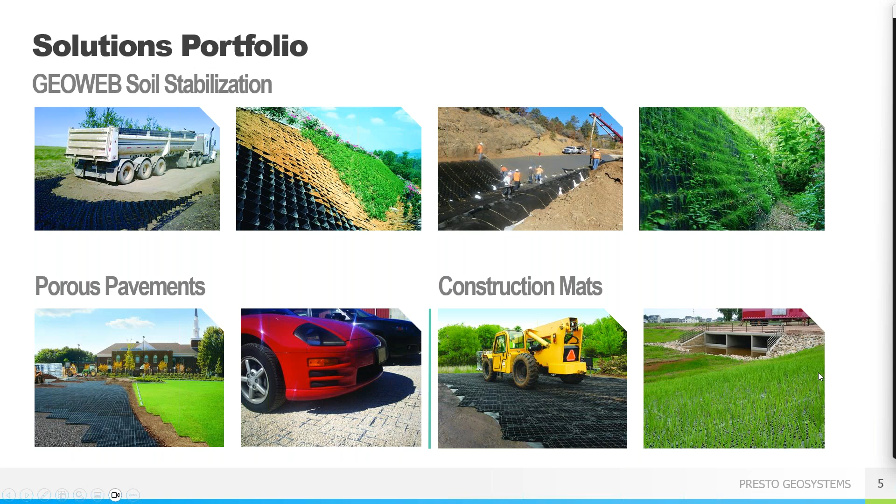We operate in 4 main categories. Today we'll be talking about load support, paved and unpaved roads. We can do slopes, different types of fill, and high flow channels, whether aggregate, topsoil, or concrete channels. We also build gravity and MSE retaining walls. We've done reinforced walls up to a couple hundred feet, so it's a pretty flexible solution. We also offer porous pavements: a vegetative porous pavement, GeoBlock, and GeoPave, which is an aggregate porous pavement. We also have construction mats, which we call GeoTerra, for accessing sites in place of timber mats.

So let's get right into how the Geoweb system works for paved and unpaved roads. The system has 2 main characteristics: the cell depth and the cell size. It comes in 3 different cell sizes, 20V, 30V, and 40V, so you're looking at 8.5 inch nominal diameter, 10.5, and then 18 inches nominal diameter. It comes in 5 different depths: 3, 4, 6, 8, and 12 inches. We do not use 12 inches for load support; it's very hard to get full compaction with a 12-inch depth, so we limit it to between 3 and 8 inches for load support applications.

It also comes in different lengths, so we'll work with you to have the best size in our project evaluation. I'll talk through the presentation about the different section lengths. When we provide a free project evaluation, we want to limit the waste, so we'll work with you laying out the system to provide the least amount of waste.

The ultrasonically welded seam that connects the cell walls is critical to the function of a geocell. That's the welded seam made inside the factory. The stronger the seam strength, the better the performance of the system, period. We make our Geoweb from 100% virgin HDPE, which provides the strongest wall strength. If the cell wall is too stiff, it can overstress the seams and potentially cause seam rupture.

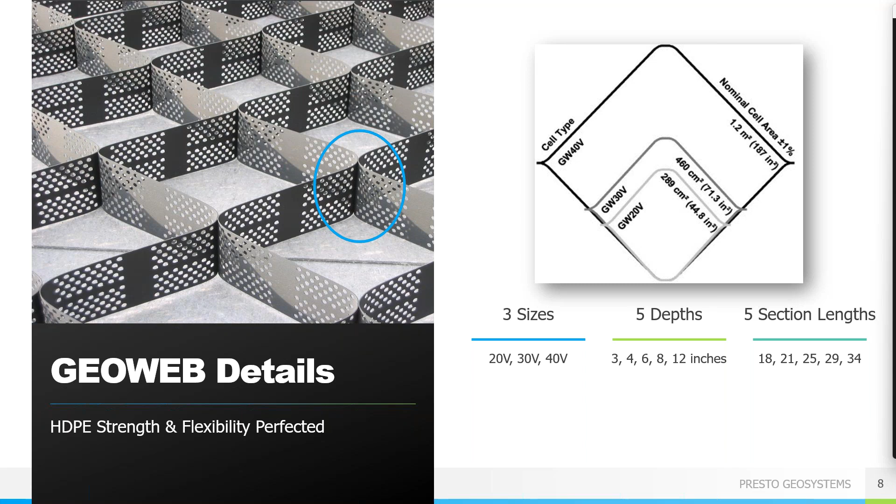Here you can see a typical Geoweb panel. It comes tri-folded on a pallet, 8.5 foot nominal, and as I mentioned before, in different section lengths.

It ships very efficiently. A typical 53-foot truck can carry about 125,000 square feet of GeoWeb and our accessories. So it does ship really effectively.

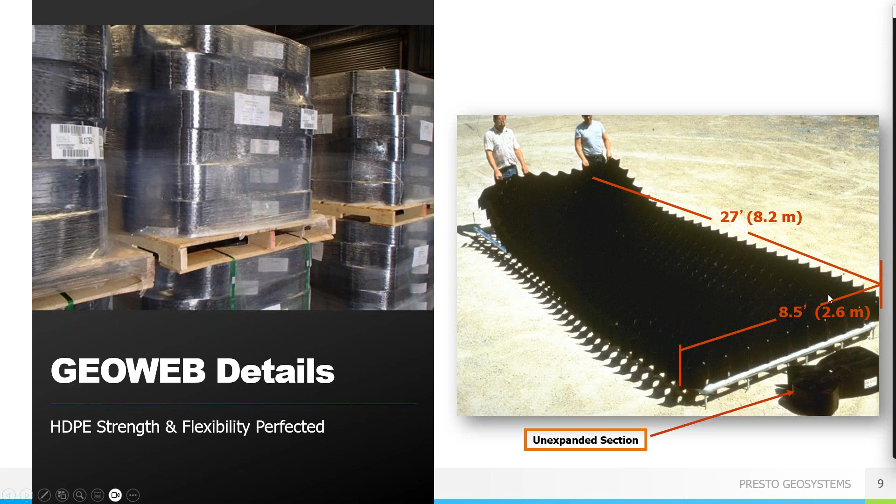The second characteristic is the infill material. There are 4 different types. We can fill it with a coarse sand. That was the original intent when we developed this technology with the Army Corps back in the 70s. It was actually called sand grid. And when we talk about sand infill, we want to make sure it's a coarse sand, like a number 35 sieve, which is about 0.5 millimeters.

We want to make sure that we don't use the beach sands or the real fine sand, stuff that doesn't drain. It compacts well, but it can actually clog, and when it gets wet, it wants to flow. So make sure it's a coarse sand, and we can work with you on that if you have a coarse sand locally available at a low cost. Like I said, it's an awesome infill. We also can use topsoil. We use it for vegetated roads, temporary vegetated roads, crushed aggregates, and concrete.

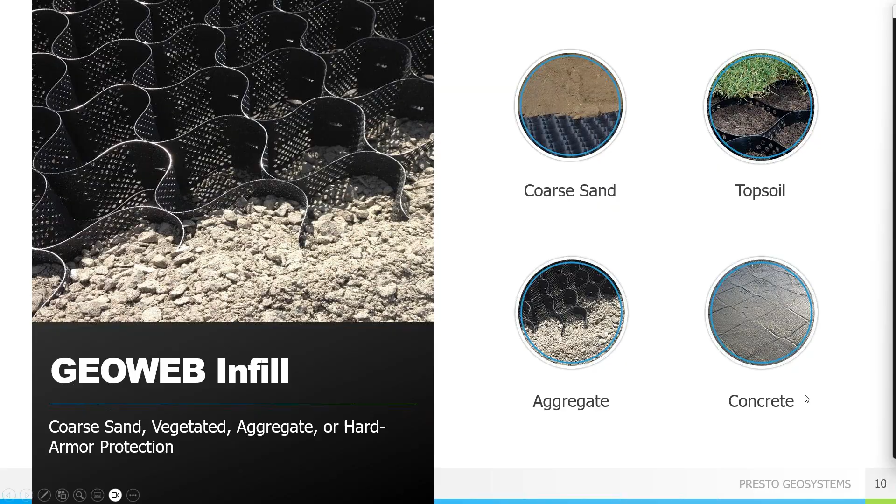So it comes with a wide range of accessories. We specifically designed all of these accessories for the various applications. They're engineered to enhance both the long-term structural integrity and the efficiency of the installation. When we provide the free evaluation, we're going to have calculations in there. Our calculations are based specifically and exclusively on using Presto's GeoWeb and our accessories, and they don't really apply to any other geocell manufacturers.

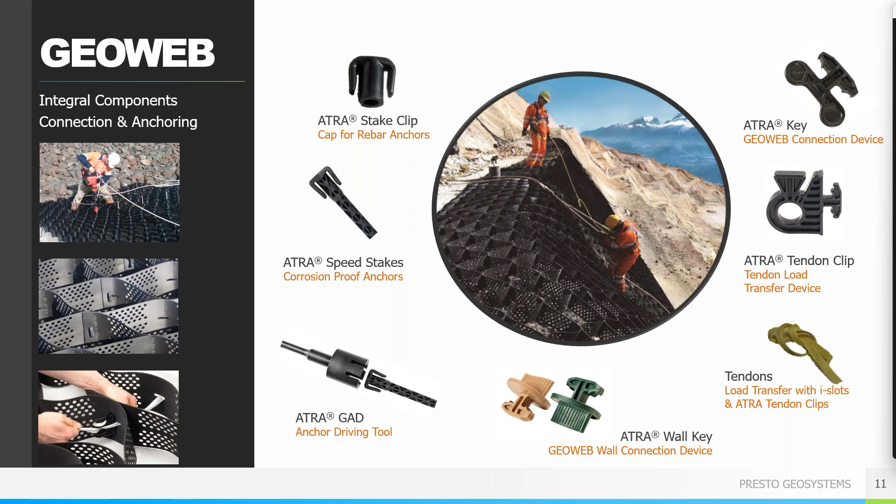So just remember that if it goes to bid and someone wants to provide a lower cost solution, make sure that they provide a full evaluation based on their accessories, because we have really the strongest accessories out there, whether that's for load support applications, slopes, walls, or channels.

For load support applications, the main one is the ATRA Key. The ATRA Key is used to connect the panels side to side and end to end. It really does speed up installation. They're made from 100% plastic, so they'll last the lifetime of the project. They really do ensure that the panels remain securely connected and don't separate under any anticipated load. Their specific engineering value pretty much guarantees the durability over time.

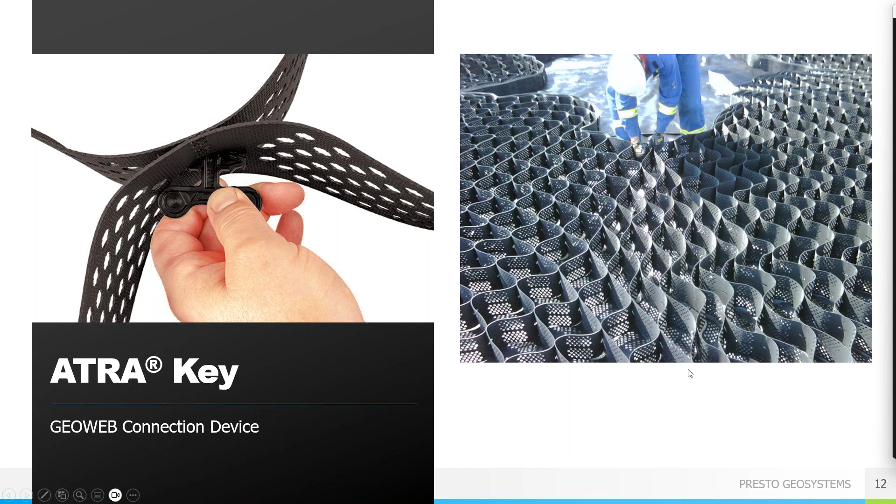When we first started using GeoWeb, we actually connected the panels with metal staples, and you can imagine over time, the metal staples are going to corrode and lead to potential separation of the panels. You can see a person here connecting the panels together with the ATRA Key. Here's an up close photo of it.

If you look at the top and bottom of the ATRA Key, you can see these frictional barbs. This is a recent improvement from a couple of years ago. We basically wanted to increase that frictional lockup between the cell wall and the ATRA Key. These frictional barbs really do protect the connection against the 3 primary modes of mechanical junction failure: shearing, splitting, and peeling. We'll also evaluate the factor of safety for those connections in our project evaluations I'll show you.

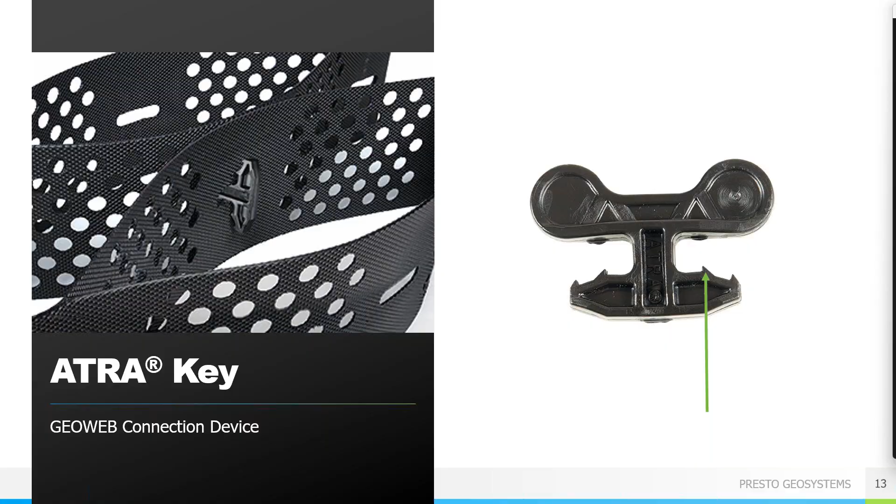So it really is crucial that you get full calculations for all of your different geocell projects, looking at those 3 primary modes of panel connection failure, which are shearing, splitting, and peeling. I just want to briefly show you a couple other ones.

When we developed our ATRA Keys, we really wanted to develop them with 2 goals in sight. One was safety. We used to use those metal staplers. You had generators, hoses, pneumatic staplers, so there were a lot of tripping hazards out there. We also went to the contractors and asked them for feedback. They said they wanted something very safe, but also very quick, and something that's going to maximize the strength, so they're not going to have to worry about any panel separation.

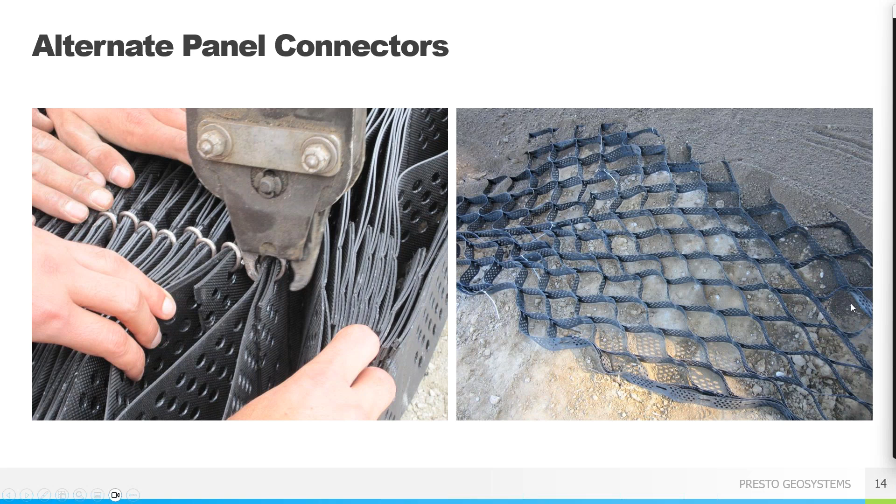So that's how we came up with the ATRA Key. It gets rid of all that associated equipment and all those tripping hazards. It allows you to connect the panels together with safety and efficiency in mind. Here's another one that shows metal hog rings. You can imagine the safety concerns with that. We do a lot of work with the railroads and mines, and you can just imagine the safety director seeing some of these connections. So just make sure that it's a safe connection when you're looking at different systems.

GeoWeb and our accessories are 100% made in the United States under a pretty stringent quality assurance and environmental control process. We comply with all the requirements of Build America, Buy America under the Infrastructure Investment and Jobs Act. So if you're interested in that, or you have a customer that has questions on that, we'd be more than happy to provide all the certifications, not only for the GeoWeb itself, but also for any type of accessory. Everything we have is made in the United States.

So it's manufactured from a proprietary blend of high quality virgin HDPE resin. We have proven our durability over the last 40 plus years since we've been installing GeoWeb. Like I mentioned before, we don't have any fillers such as calcium carbonate, recycled materials, or polymer alloys. It's 100% HDPE.

We add carbon black to it for UV protection, or HALS for color protection if it's for walls. But testing has shown well over 100 years even before the carbon starts to degrade, and that's when it's subjected to 100% direct UV sunlight. Load support applications are always buried in the ground, so they're going to pretty much last forever. So just make sure that the geocells you're looking at are 100% HDPE.

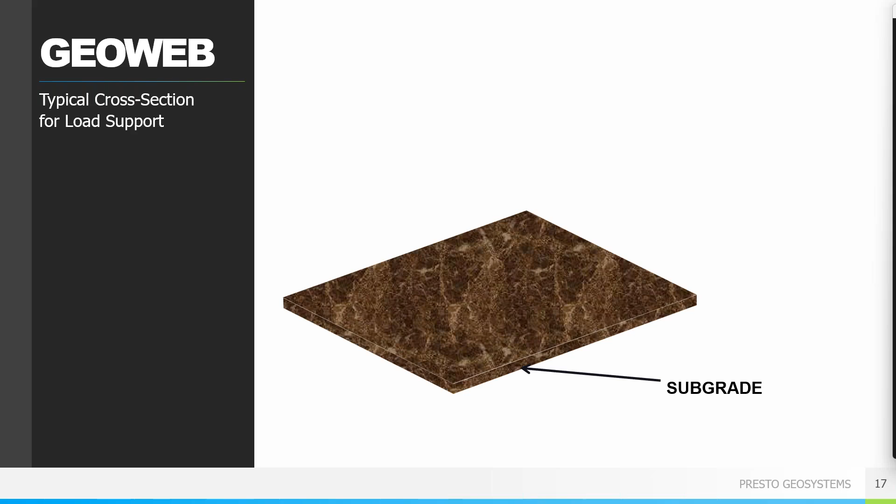Here's just a typical cross section. You've got a subgrade under a certain strength. We're usually going to put a woven or a non-woven geotextile down. When I talk about woven geotextiles, they're not slit tape wovens that don't allow water to flow freely to the subgrade.

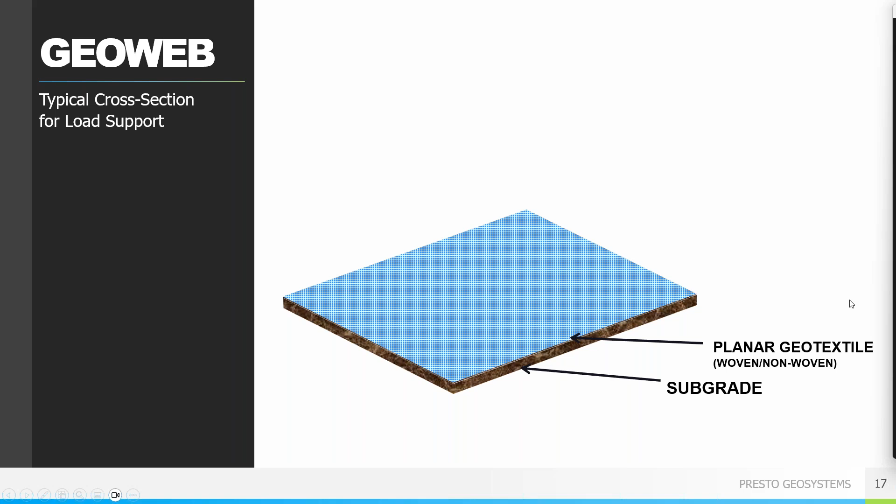So we're going to have what I call enhanced wovens, or what they're called in the new AREMA railroad spec or the new AASHTO M288 highway spec. So they're called enhanced woven geotextiles. They allow water to freely flow. They keep the fines underneath, but they also provide reinforcement starting at about 2,800 pounds per foot. They're pretty inexpensive, so you really get a lot of bang for your buck.

So sometimes we're going to have a sub base, and we'll determine that based on your site specific conditions, what your subgrade strength is and what the load is. We're going to have a GeoWeb panel. Once again, we'll do the size and the structure. Infill, as I mentioned, is very flexible. We can use coarse sands, aggregate, topsoil if you want a vegetated type surface, aggregate for temporary roads, or even concrete.

So depending on the application, a paved or unpaved road, if it's unpaved, usually we're going to have about a 2-inch wear surface over the top of it, just to protect those top cell walls. So we'll make sure the evaluation that we provide to you really does support all of those loads throughout the life of the project.

So this is how 3D confinement really works. When you have a given vertical load, we really want to get that vertical load as horizontal as possible. So that's where we really shine with those low quality aggregates, the coarse sands, and potentially even recycled materials. We want that vertical load to activate the active earth pressure inside of the loaded cell, to actually direct that vertical load horizontally, engage it with the cell wall to engage the hoop stresses, and also to engage the passive earth pressure in the adjacent cells. So the active pressure pushes out, and the passive earth pressure pushes in to really support that load.

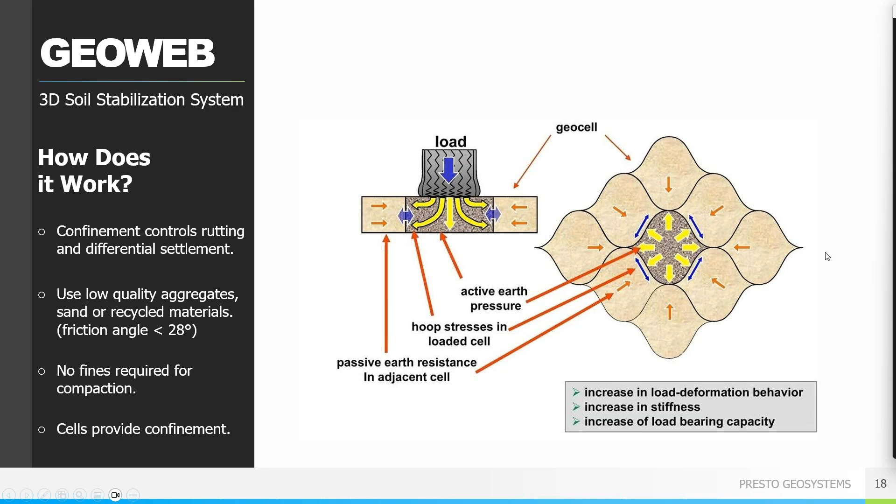Another good thing about GeoWeb is we really do provide the confinement. So a lot of our projects will have open graded aggregate for, as I mentioned before, stormwater control. A lot of times, if you have a situation where you need to get a lot of drainage through the cross section, we can fill it with basically no fines in it, because the GeoWeb will provide that confinement. So another option is an open graded aggregate if you want a lot of drainage.

Here you can see the difference of stresses on the subgrade due to the loading. You can see the unreinforced on the left, with a typical 45-degree load distribution. You see all your high stresses here, the red and the orange. How the GeoWeb really works is what we call the mattress effect. It really spreads that load out over a much wider distribution angle.

So by spreading it out, we're going to significantly reduce the stress reaching the subgrade. Rule of thumb, if you're looking at a GeoWeb load support, we can reduce that stress by at least 50%, because we completely eliminate all those high stresses, the red and the orange. So our rule of thumb is about 50% starting out.

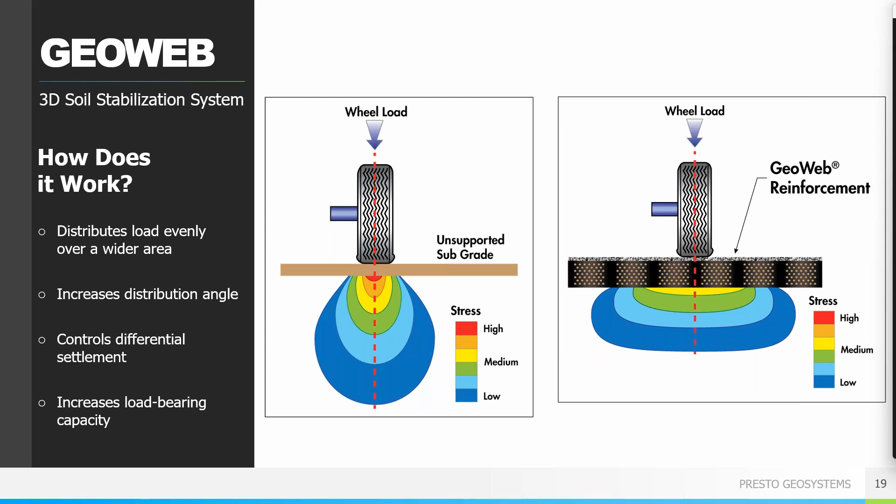So extremely strong. Let's talk a little bit about some recent research that we've done. We went to the University of Kansas under the direction of Jie Han. I'm sure a lot of people have heard of Jie, seen him at conferences. He's part of the Giroud-Han formula for unpaved roads and for geocells, geogrids, and other geotextiles. He's been working on geocells for 20 plus years.

Ben Leshchinsky from Oregon State completed his PhD thesis on geocells. He's also the chairman of the IGS committee right now, and he did the finite element analysis. Then Hai Huang from Penn State provided some smart rock technology.

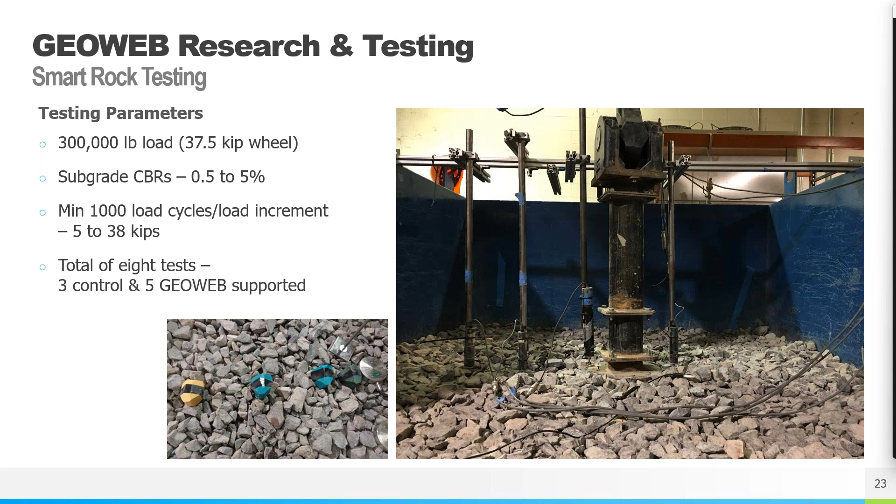Here you can see me using this recent technology to look at the stabilization benefits of that system. We used basically a loaded cell, and we put earth pressure sensors in there to measure the earth pressure and the stress distribution through. We also added some smart rocks through Dr. Huang from Penn State. What these do is measure how the particles move through the cross section when they're under a cyclical load. So we added those smart rocks inside of the GeoWeb.

You can imagine, through confinement, there's hardly going to be any movement at all. We also placed them halfway between the top of the cell and the top of the cross section—a couple inches below and a couple inches above the top cell of the GeoWeb system. So we really wanted to see how we could document reducing the stress above.

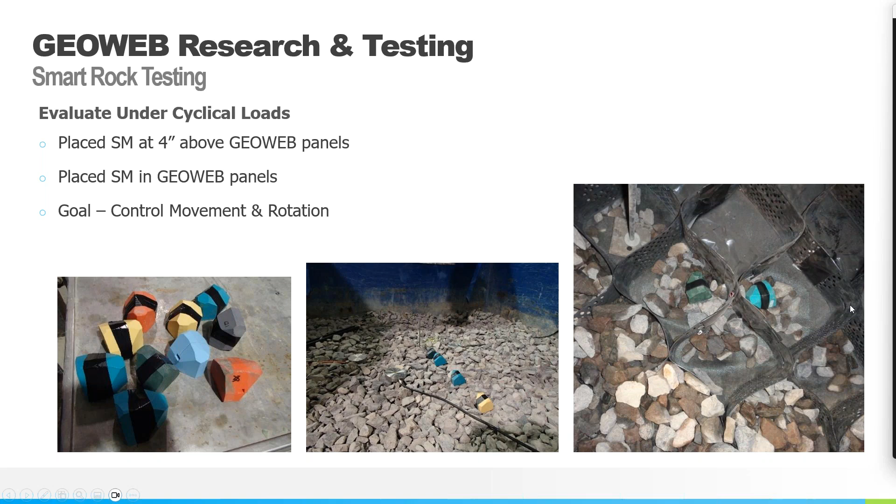Over the last 40 years, many people have reached out, but we've never really had the ability to use these smart rocks. It's a recent technology, only over the last 5-6 years. So we really wanted to see how that aggregate moves.

Here you can see this is basically how it moves in rotation—how that aggregate particle is going to move. So this is measuring your rotation. We also wanted to measure the movement, so how it moves in the XY plane. So every cyclical load, we want to see not only does it rotate, but does it move. Why is that important?

Because when a particle moves under an unpaved or even a paved surface under stress, if it starts to move, it's going to start to break down. We see this a lot on railroads where you get ballast breakdown and attrition and settlement. You've got to go in there, do some retuning of the ballast layers and tamping. So it is pretty impressive.

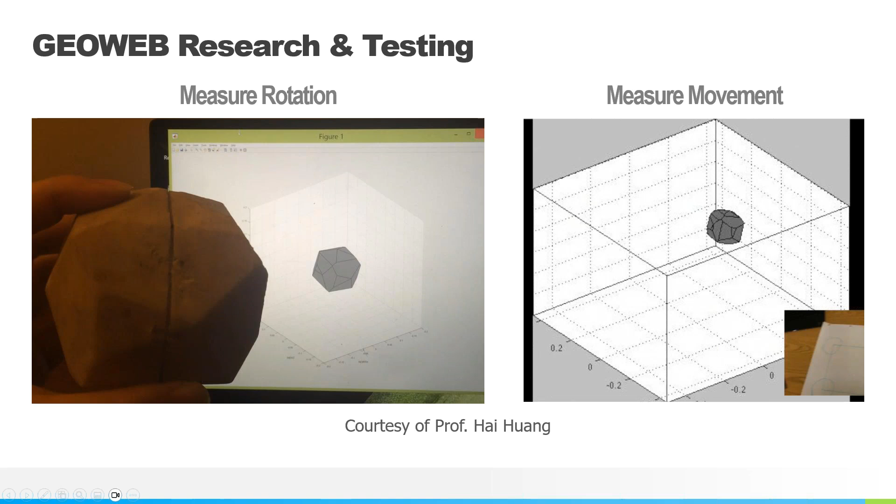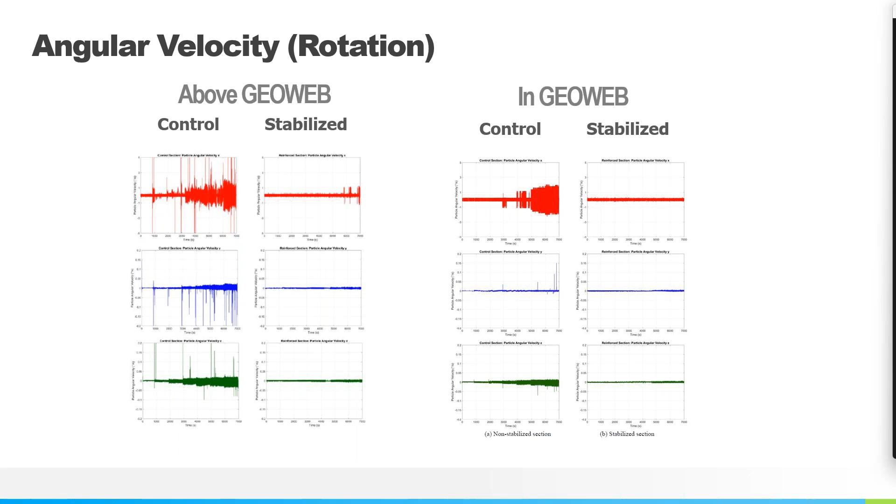This one really does illustrate the angular velocity—how fast that aggregate particle rotates. You can see the big one is inside the GeoWeb. You can imagine there's going to be very little movement in the stabilized section inside the GeoWeb panel. But this is a couple inches above the GeoWeb panel and below that surface. You can see in the control section, where there's no stability, there are massive amounts of rotation of that aggregate particle. So it's going to want to roll. It's going to want to break down over time.

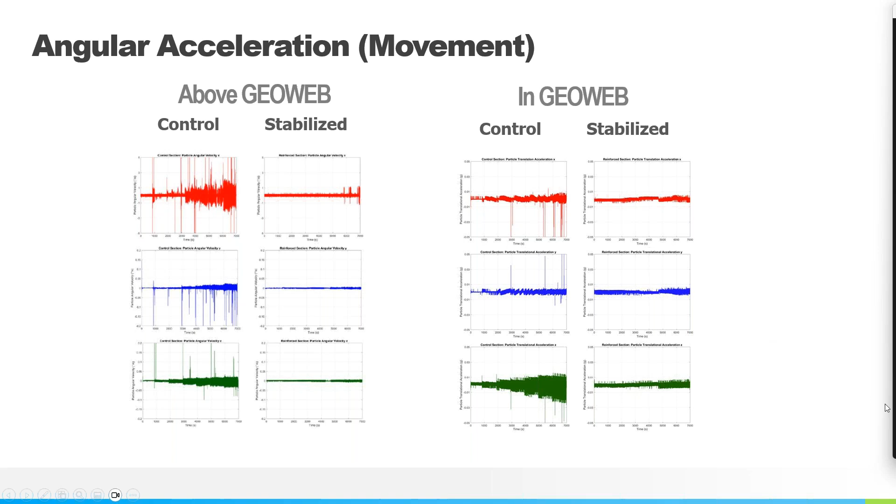Once again, another slide looking at movement—the back and forth I showed you. In the GeoWeb panel, you can imagine no real improvement needed, since there's little movement in the stabilized section already. But here in the control versus stabilized, a couple inches above, you can see once again massive lateral movement of that particle. The GeoWeb almost completely eliminates any movement in that zone. Why is that important? Because you're not going to get any rutting. So for unpaved roads, we're going to really decrease or almost eliminate that rutting above the GeoWeb layer. And we can actually prove this to you in the calculation.

So, pretty impressive results. We're going to really reduce the pressure reaching the sub base. That's really accomplished through the stabilization and the prevention of both the lateral movement and the rotation of that aggregate particle. So by reducing that movement, we're really going to decrease the abrasion and attrition—basically less or no rutting. So less attrition means you're going to have a stronger and stable surface.

So really for unpaved roads, we can significantly decrease the amount of maintenance that you're doing. We have a lot of case studies out there. We've saved on big areas like reach stackers for intermodal and port yards, for aggregates, mining haul roads where we had projects that were on, say, a mining haul road, almost every day with the grader maintaining those roads, and we could cut that to a month or less even. So it's a pretty significant reduction. If you have any interest in that, please reach out to me and I can provide some case studies.

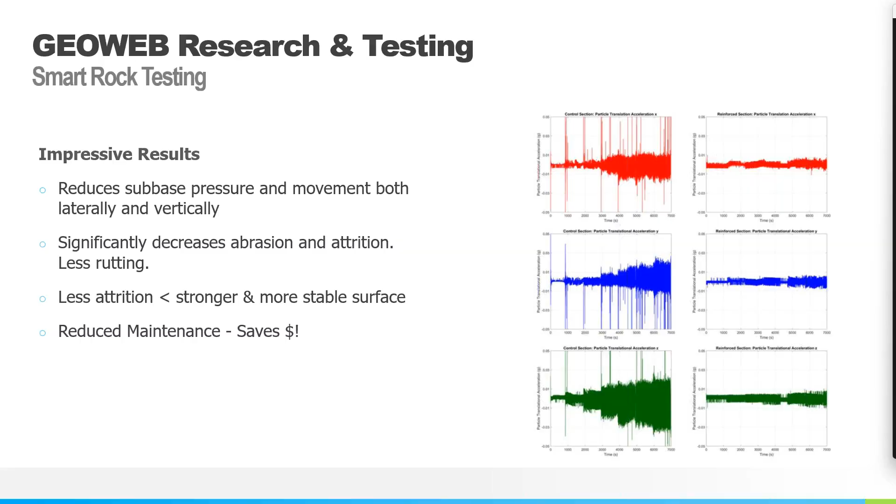So just a couple examples here on some unpaved roads. This was a project that we did down in Louisiana. This was interesting because it was a value engineered solution. Burns & McDonnell, we do a lot of work with them, and they had this job down there with pretty low subgrade CBRs, a wet area. It's in Louisiana, so high rains.

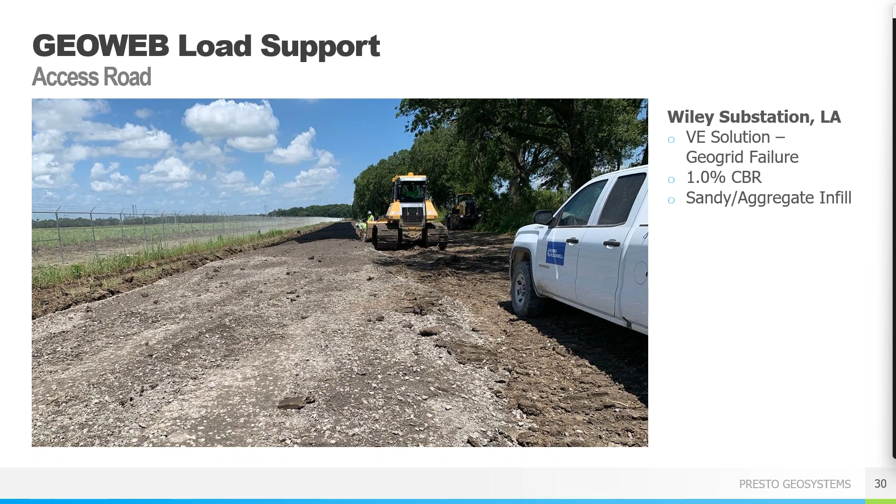They had a project they started on. They were going to use some geogrids and about 12 inches of aggregate. They started on the project, and it was basically just too wet. The subgrade was too soft or too low for the geogrids to work, and they had to pull it all out. And they came to us, and we did a value engineering solution using one of those enhanced woven geotextiles.

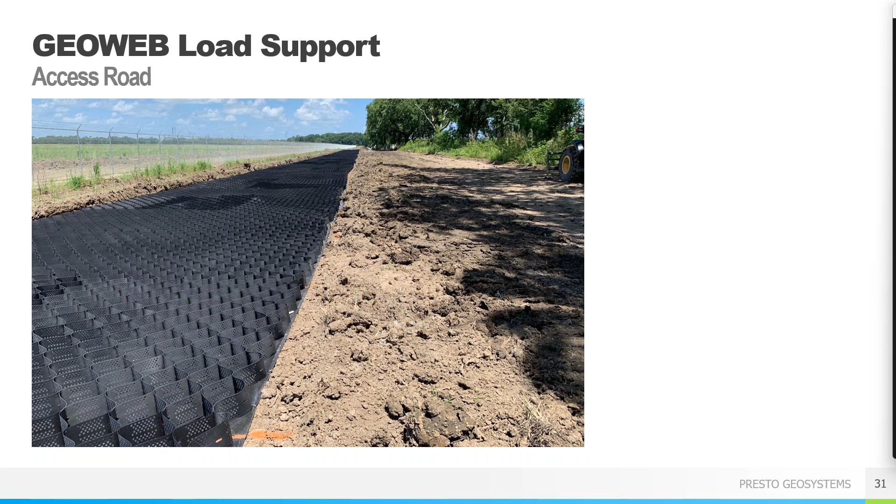You can see GeoWeb is, as I mentioned before too, really flexible. It can accommodate either inside or outside curves. You basically just over-expand or under-expand them.

And just so you know, we will be on site on these projects to help the contractor. We also do a lot of Teams meetings beforehand to go through methods to help the installation process, speed it up, and make it more efficient. So like I said, we'll be on site with you, whether that's one of our manufacturer's reps who is certified and trained before they go out on site, or it's going to be someone from Presto itself. We've been all around the world doing installs, so we'll definitely be there to support you and your contractor.

So here you can just see how pretty much how easy it is. You just back the dump truck up to the edge of the GeoWeb panel. You're going to have, most of the time, a dozer or grader, something with a GPS unit on it, where they just spread it out. Like I said, it goes down really fast. The good thing here is they saved a lot of money, not only in time and something that worked, but they were able to use that low quality fill, which saved them a good deal of money.

And here you can see the final road going in and around the corners. This one's been in for probably five to six years now, and they just do limited maintenance, just to get the surface up to maintain a couple inch wear surface.

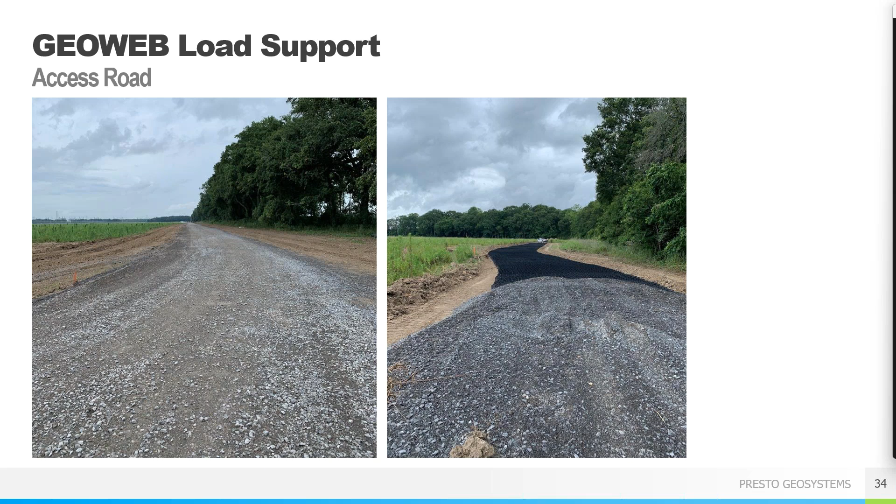So this was an interesting project we did up in Canada. This was for a big sawmill. In the spring and summer, they had a lot of snow melt and rain, which caused a lot of flooding and soft ground. You can imagine the permafrost or the frost coming on the ground created a lot of issues—drainage issues and rutting—basically creating some really unsafe conditions for the workers, but more importantly, it just wreaked havoc on the machinery. So all the machines running around that yard were getting all gunked up with mud and muck, so they had to do a lot of maintenance.

So this owner had used GeoWeb successfully before, so they reached out to our distributor in Canada, and they went to the site, saw it, took some pictures, and came back. We prepared a full evaluation for them—written summary, cross sections, calculations, specs, and installation support.

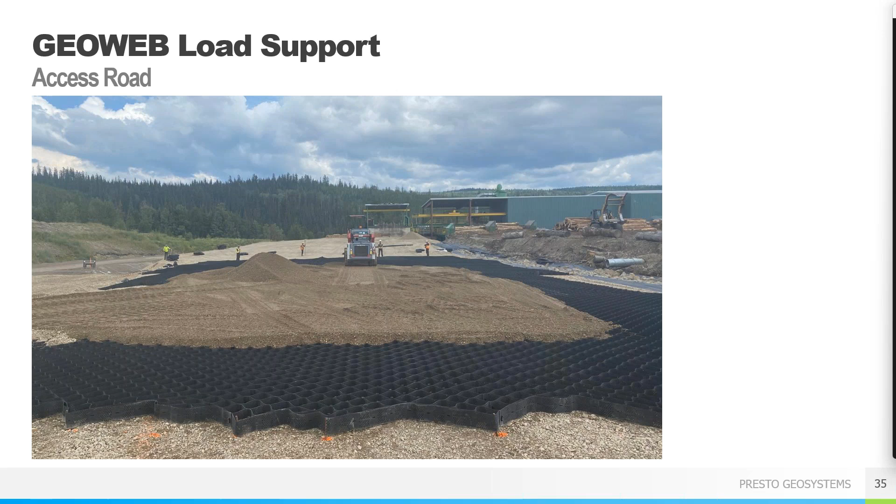Really had to come up with something not only to support those loads, but to manage that water, manage that snow melt, and also stormwater, with the heavy rains that came into the summer, into the fall. So the engineer here called out for a really large rock, I think about a 2-inch minus.

So they really wanted to get that water to flow freely underneath the GeoWeb layer. They put down a non-woven or enhanced woven geotextile, built up that layer, then another layer of enhanced woven geotextile, and a 6-inch GeoWeb layer on top with a 2 to 3 inch wear surface. Rule of thumb if you want water to flow freely through here, you want to shoot for about 12% plus or minus a little bit for the fines content.

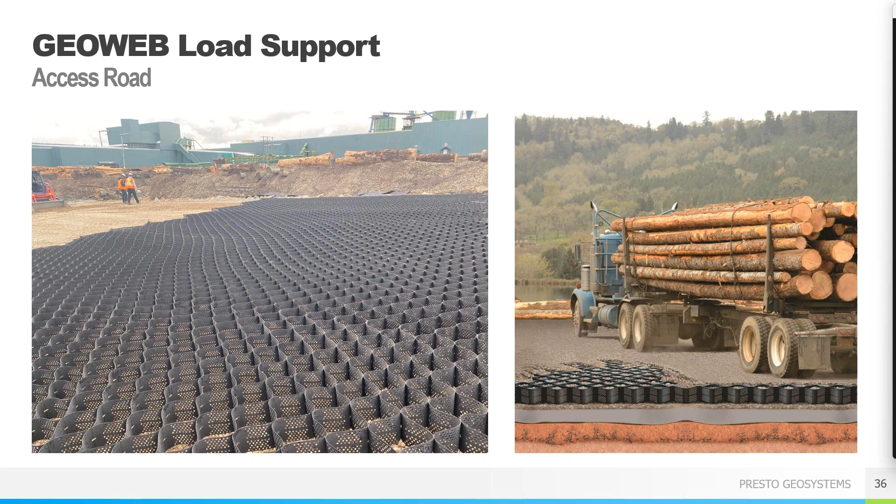Passing the 200 sieve, you want to be able to have that water flow. Rule of thumb, 12% plus or minus a little bit. The 200 sieve really allows for free drainage. We will work with you—if you can send us gradation curves, we'll take a look and tell you, in our opinion, if it'll work and if it will drain. You can see here, this one's about 12 to 14% fines.

So just infilling it into the panels, once again the enhanced woven geotextile. We'll work with you on that infill material.

Here you can see the project going in, creating a smooth platform. I like to show this slide because of rolling and compaction. Most contractors, when installing things for load support, whether it's grids or fabrics or anything, or unreinforced, they really want to hammer it with vibration.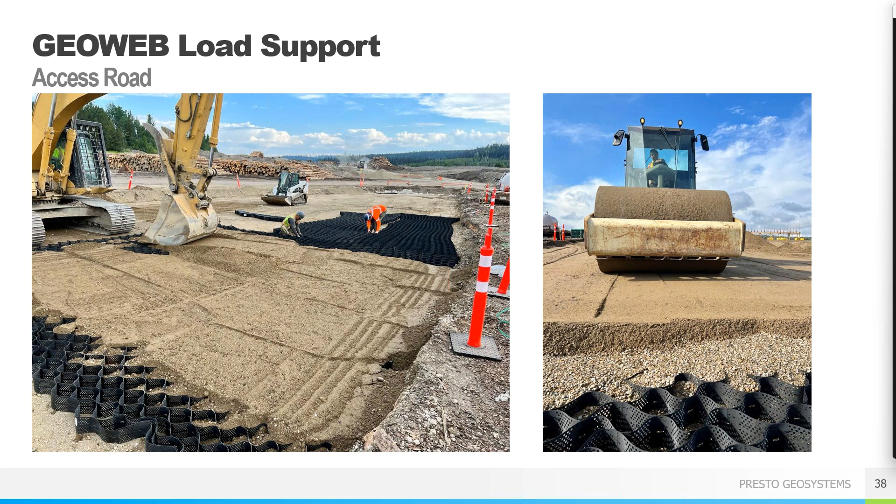Once again, someone from us will be on site, so we'll be able to monitor that too with you when they get started. So here's a project we did back a couple years ago.

The customer reached out to us because they had a failing access road, and we'd had really good project success with them. This was a 7.5 mile road, a secondary road into a regional facility up in Canada. Once again, spring melt, snow, frost. This road went to neglect because they didn't maintain it, so they wanted to improve it because they're opening up another facility.

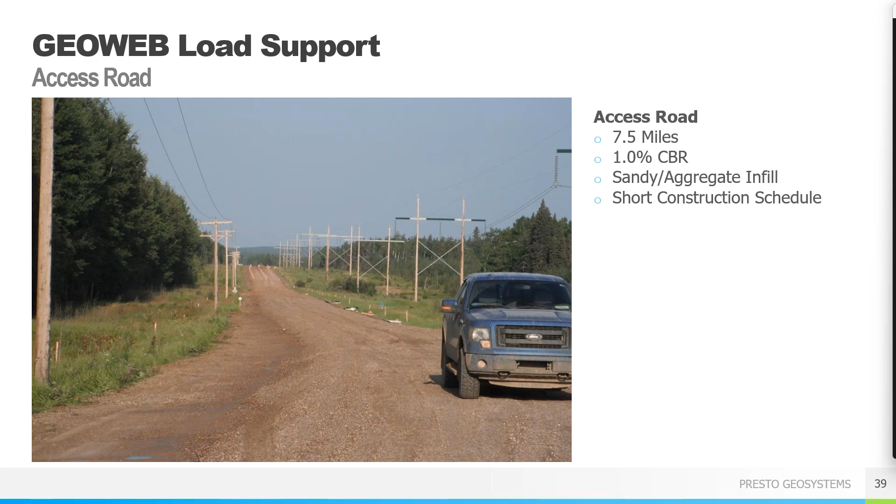One of the issues is we had a really brief period of only 2 weeks to get all 7.5 miles of road done. We did successfully complete it as designed during the wet season.

Here you can see the roadway before the installation began—very wet, low strength subgrade, about a CBR of 1. It did vary from almost 0.5 up to about 1.5.

So we had the stage materials on the side of the road. This really helps speed up installation, so you don't have to handle materials multiple times. We can help you with that through the Teams meeting and on site.

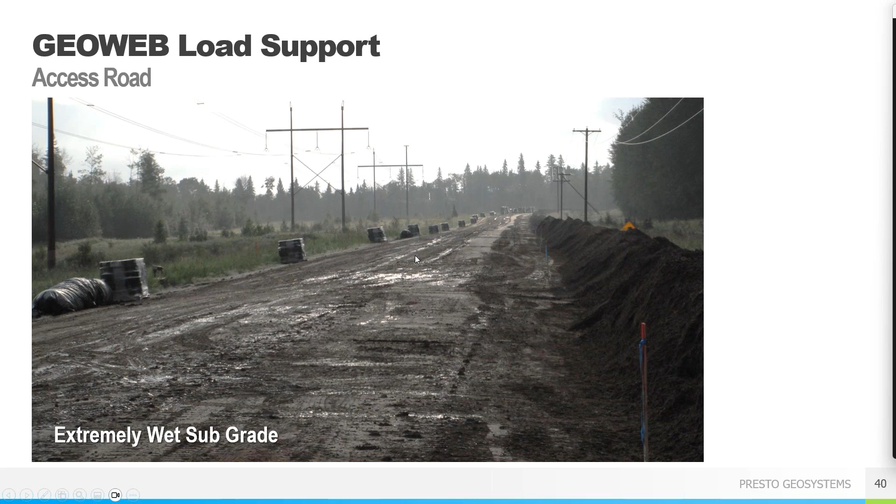We also had this fiber optic line running down one side of the road, so we really had to restrict anything going on that side of the road where the fiber optic line was. Here you can see the panels being connected with the ATRA keys.

Something I'd recommend for any load support application, whether it's using geotextiles with or without GeoWeb: if you're looking at long roads using woven geotextiles, more than one roll, say 15 feet, you should really evaluate the use of factory seaming them. If anyone's tried to overlap geotextiles in the field, especially in an open, windy field—for low subgrades we use the AASHTO M288 spec, which requires about 3 feet of overlap on really low subgrade CBR and less. So it's important to have a consistent 3-foot seam overlap, especially when it's windy, 20-30 mile winds, out in the middle of a farm field.

If you've ever done it, you understand what I'm saying, because it just blows - it's almost impossible to get that. So really take a look at factory seaming. We can work through that with you with our distribution network and the geotextile manufacturers. If that's something you want to look at, we'll look at it too. If it's a good option, cost-wise it's about the same - a little bit of cost to seam it pretty much covers the cost of overlapping the field. So it's a very good thing to look at for wider applications.

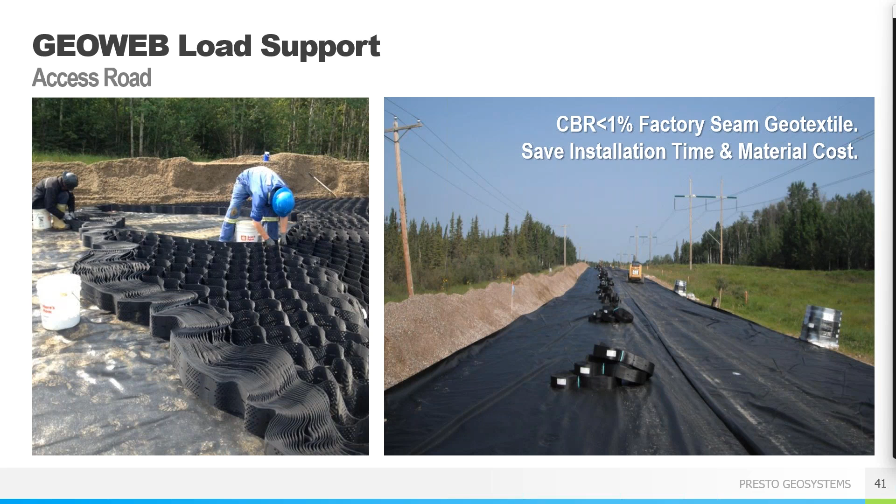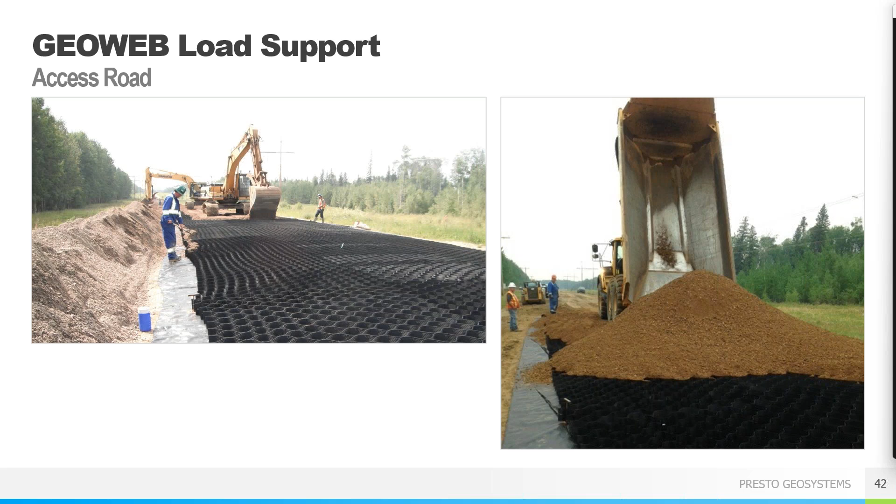Here you can just see the infill being stockpiled. Once again, this backs up and dumps the aggregate infill. This was a low quality aggregate, not very high quality, had a lot of sand in it, a lot of coarse sand. We don't want to use fine sands, but this is a coarse sand aggregate mix, about a 3/4 inch crush with a lot of sand in it. Here you can see we're getting that aggregate in, spreading it out and placing it with the bulldozer, usually with the GPS unit on it.

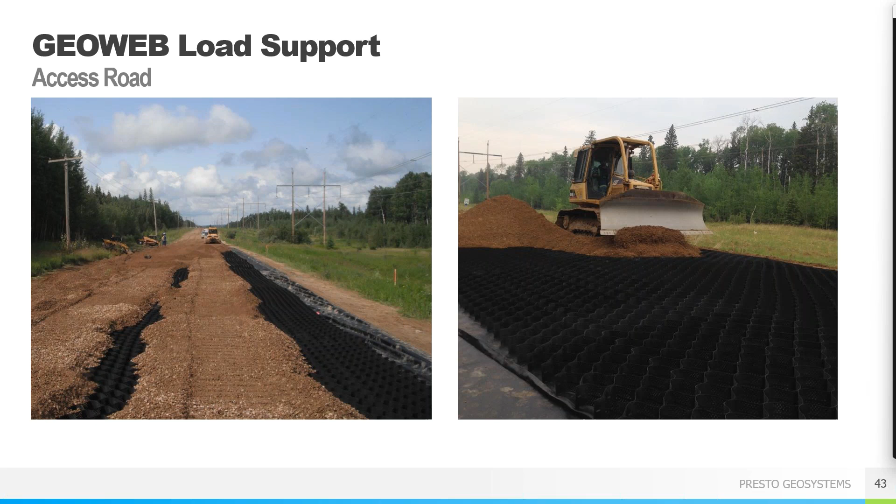It goes in very fast. Rule of thumb for just placing the GeoWeb and geotextile, you can usually get about 3,000 plus square feet an hour with 3 guys, so it goes down very fast. Some of these sites, especially on this road, once they got going and had some experience with it, they were up to 4,000 to 5,000 square feet an hour. So it goes very fast.

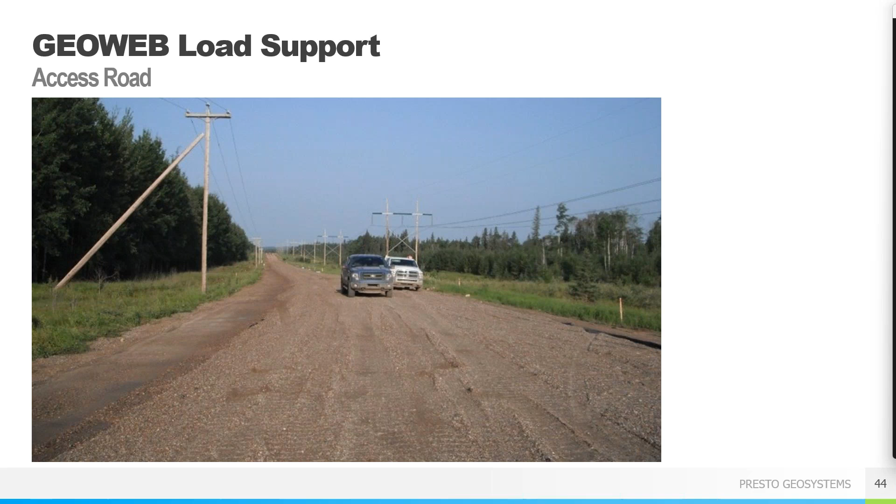Here you can just see the finished road. We completed it in that 2 to 3 week time span. Like I said, a good team of 3 guys can do 3,000 to 4,000 square feet an hour. This was 1.3 million square feet of haul road, so we did it in less than 3 weeks. Pretty impressive.

This is an interesting application: road shoulders. I'm sure we've all driven on the highway and seen road shoulders, how they get eroded, how they can't support the load they're subjected to. We do a lot of road shoulders all over the world - we can support the heavy traffic.

I mentioned before that we can have a vegetated road surface using GeoWeb. What we do for that, we call it an engineered fill, which is just a 2/3 mixture of like a 3/4 inch crushed and topsoil. We have a specific spec we can work on with you, but if you're ever looking for a vegetated temporary access road, which we do for a lot of communication towers, or even solar fields, we're going to use that 2/3 aggregate, 1/3 topsoil mix. Just mix it together and put it into the GeoWeb panel - 2 buckets of aggregate and a bucket of topsoil, mix it up and put it in.

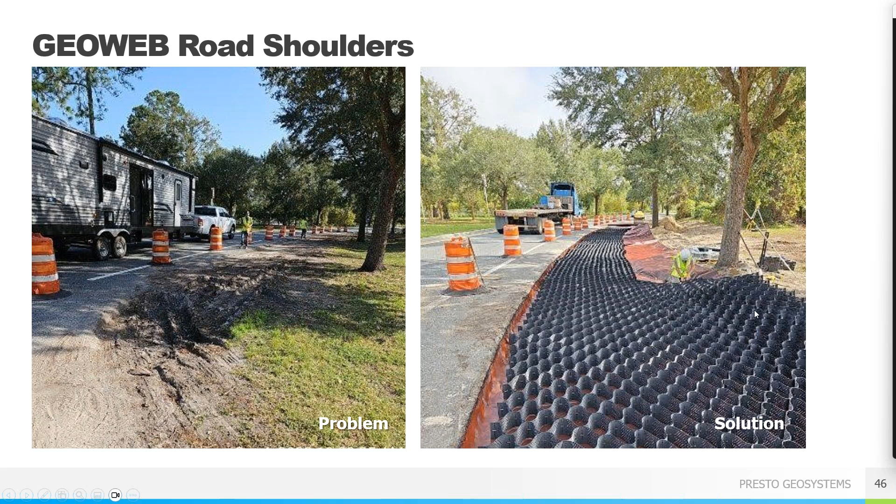We put down an enhanced woven geotextile. Here we used a 6-inch web, filled it with - this is in Florida, so it's pretty much a low quality granular fill, a limestone fill, so it was a sandy limestone fill. It's pretty cost effective for this installation, but really that enhanced woven keeps clays and anything from basically migrating up and clogging that cross section. Here you can see it extending up the road - it's been in for a little over a year and haven't touched it.

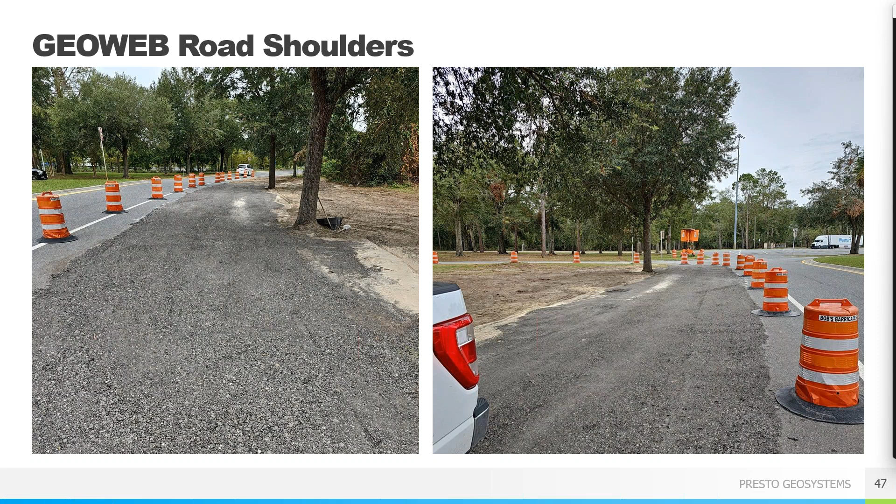So if you have an aggregate, please let us know, we can help you out on that. Another thing I mentioned before is the open graded aggregate - we get a significant amount of water either stored in the GeoWeb or allowed to flow through. So we want to keep that 200 sieve to about 12, give or take a couple percent. Rule of thumb, a 3/4 inch aggregate, pretty much engineered.

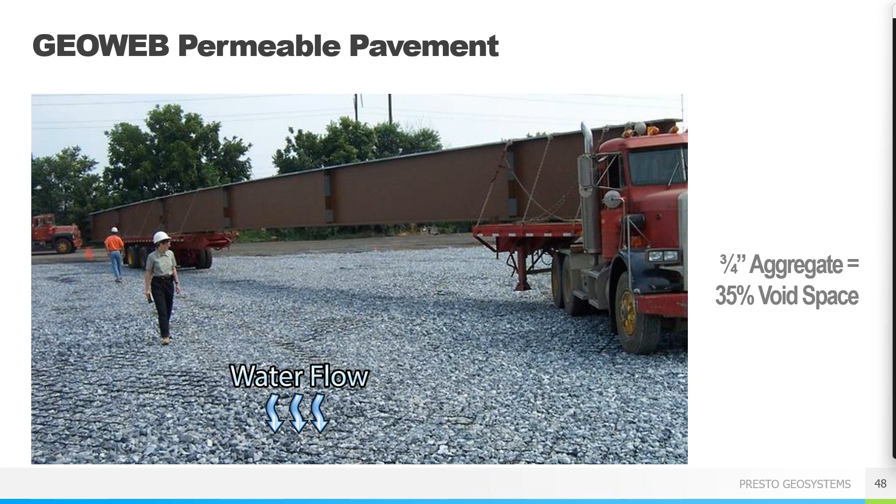Worldwide, a 3/4 inch aggregate has about a 35% void space. So if you have a big yard, just imagine how much water you can store inside of that. And maybe, depending on your local regulations, whether it's restricting hard surface paving, you might even get credits. This is a project we did over in Europe where they weren't allowed to do any more hard surface paving.

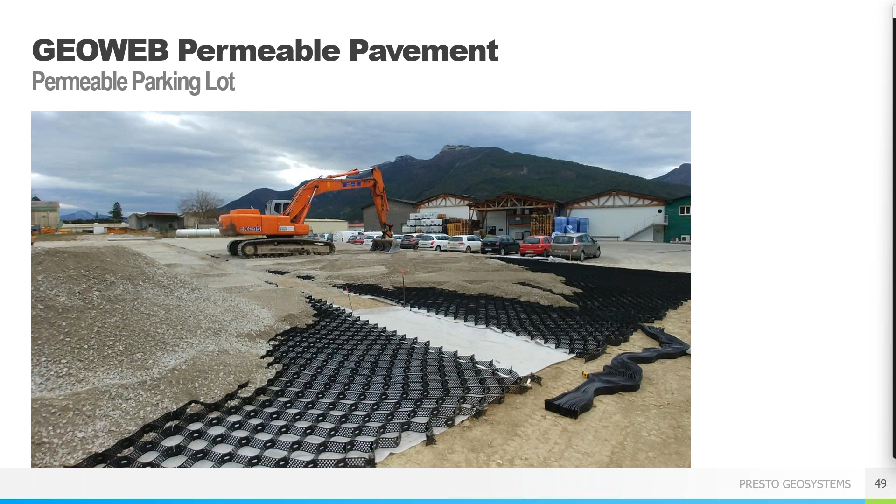So they allowed them to take the volume, 35% of the area and the depth of the geocell, as storage, and then they basically trickle in from there. They were able to expand their parking area by getting the credit of that 35% of water storage inside the panels. So they didn't have to worry about expanding the stormwater ponds, which they didn't have the ability to do. So it allowed them to expand their parking area.

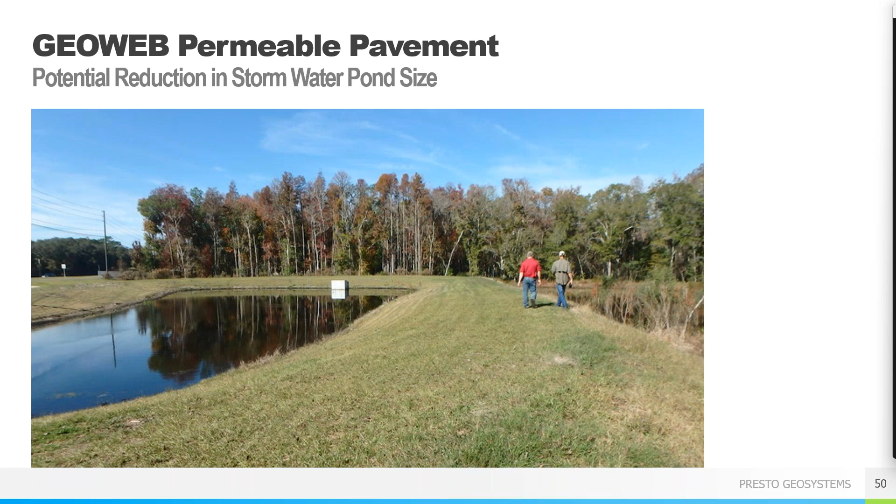Oops, missed a slide. So, like I said, since we provide confinement, we really can confine that open graded material, even 0% fines passing the 200 sieve. We're going to provide a lot of storage on that. We can help you with that. We can also help you with stormwater requirements depending on your state regs. So if you have any questions or any projects, reach out and we can take a look and see if we can help you out.

For all of our evaluations, we're going to provide a full evaluation regardless of size, whether it's a 500 square foot driveway or a 10 million square foot haul road. We're going to provide basically the free support. We're going to have a written summary. We're going to have calculations. All I really need is the wheel load or type of vehicle. If you give us an AASHTO rating of a vehicle, or if it's a mine haul road, the type of CAT loader that's going to go across it. From there, we get tire pressures.

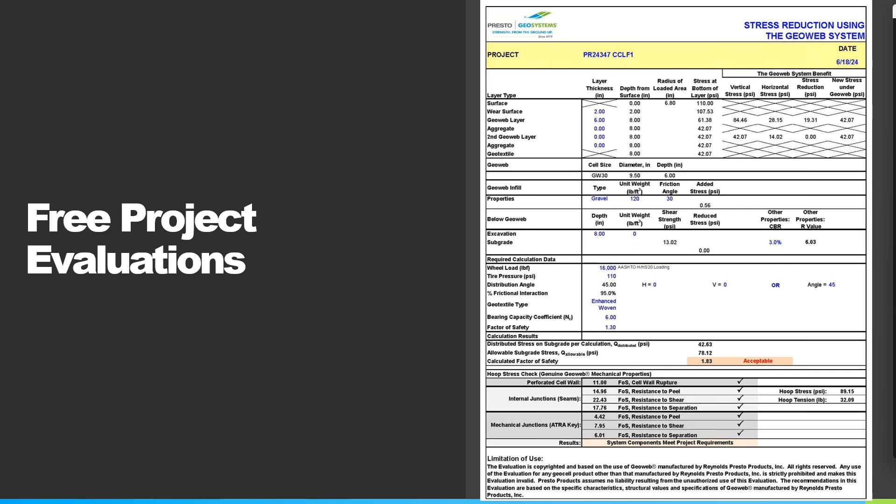We'll determine the type of geotextile, whether it's an enhanced woven, a non-woven geotextile or no geotextile at all. We're going to provide that service back to you in a couple days. We'll give you the calculation. We try to aim for a minimum factor of safety of 1.3. We'll go through all of those calculations with you.

So we assess the factor of safety not only for the load support itself, but we also look at the internal junctions, those are the welded seams in the factory, and also the mechanical junctions, so the field junctions. We check to make sure that we have adequate factor of safety so that panels are not going to separate over time. So make sure that if you get a calculation, it checks all your internal junctions, the welded seams under load, and also the field connections, which are the ATRA keys. And also make sure that you check your hoop stress and your hoop tension to make sure you're not overstressing the cells.

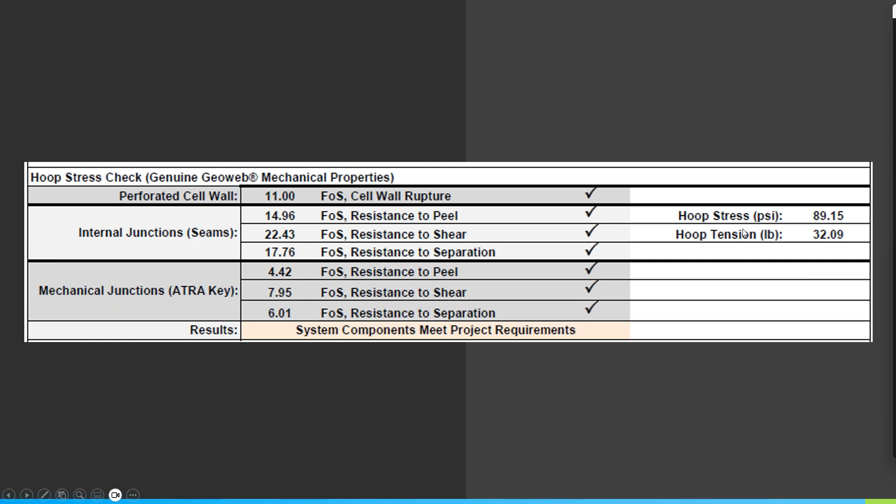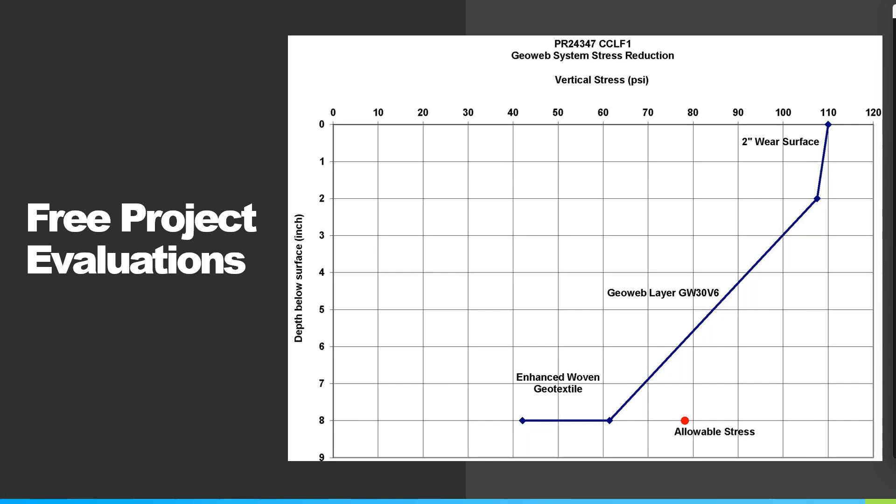We use this a lot for pipeline protection projects, whether that's for gravity sewers, stormwater, force mains, even fiber optic lines. So if you want to limit the stress on your system, we can provide that stress underneath the Geoweb system. Also on stormwater management, if you have any stormwater cubes on site where you've got to limit that, we can provide that stress distribution at the top of that surface.

We can also modify the Giroud-Han for unpaved roads. So if you have a lot of passes on the unpaved road, we'll work with you there and provide this curve. You can see between reinforced with Geoweb and unreinforced, you're talking basically over a foot of thickness, a foot and a half of thickness. So it's pretty significant.

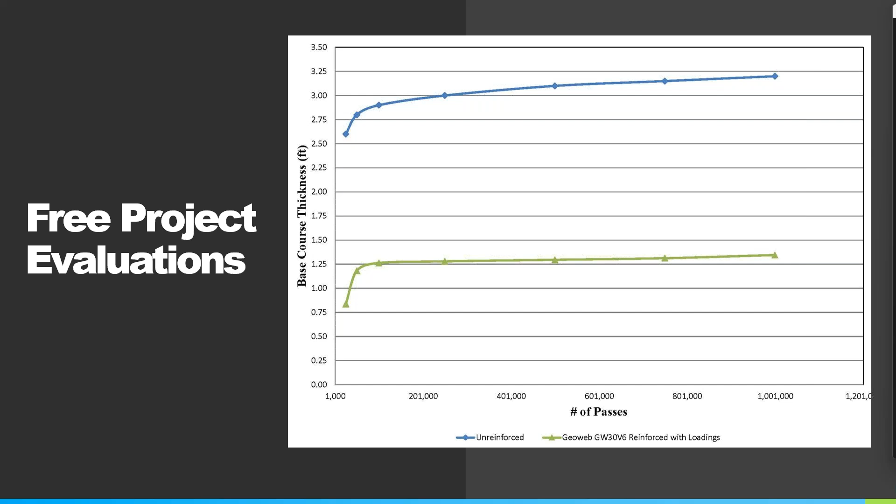So like I said, if you're looking at not only hauling in a high quality aggregate, if we can get by with a lower quality aggregate, you're gonna have a lot of cost savings in material, but also imagine the trucking, the installation time, and a lot of things lately we're looking at CO2 reduction. So if that's a part of your evaluation, let us know. We can help you with the CO2 reduction calculations also.

So a lot of times we're doing projects where they don't have the money to do any kind of soil geotech report or do any field DCP tests. So I have this laminated chart. I've handed out thousands and thousands of these over the years. It's pretty much a standard chart for all our geosynthetic manufacturers, but if you have an engineer out in the field or you're out in the field, if you carry this chart, I'll send it to you if you're interested.

If you're just walking across the site, say the person sinks over 3 inches, I can correlate that to a CBR, a shear strength, a blow count, and even a hand penetrometer reading. If you have a hand penetrometer, I can use that to convert it to CBRs and blow counts too.

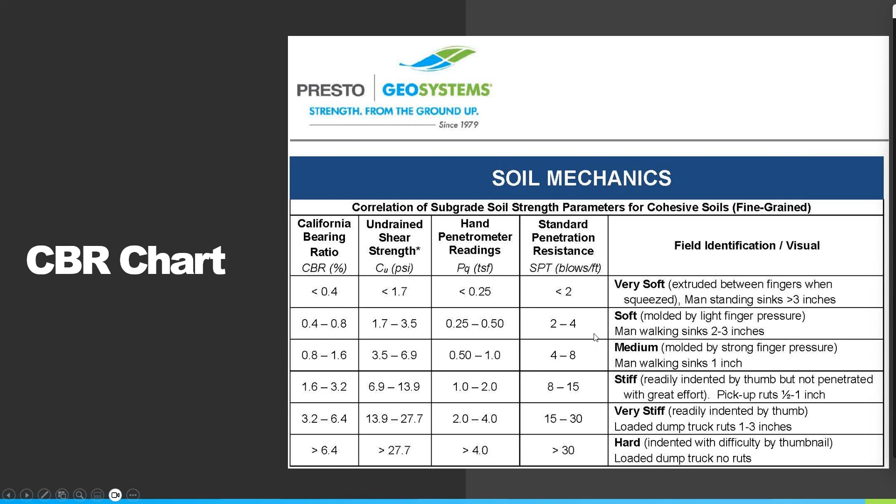So if you're interested in this, like I said, a lot of projects, I'm just going to get a call: hey, Brian, I got a guy out in the field. He's walking across it and he sinks about an inch or two. From that, I can go back and estimate what a CBR is, provide an evaluation, and we tweak it from there. So we don't need a full geotech report or DCPs or penetrometers. It's helpful, of course, but it's not required. So like I said, if you're interested, let me know and I can give you a copy of that chart laminated.

So we'll talk about some paved surfaces. This was a cool project we were involved in. This was for the Ohio DOT, for a small community in Ohio. This was the main highway that goes through town. The initial project they were looking at was some geogrids and cement lime stabilization, about a 16-inch cross section. That wasn't really the issue. The issue was they couldn't have it down for the waiting time for the lime stabilization. The local business owners, being shut down for weeks on the main access, that was not an option. So that was thrown out.

So they came to us. There also were some really shallow utilities here, some shallow sewer lines and things like that. If it got into a full replacement of those sewer and water lines, there's no way they would have been able to complete it on time. So they came to us and we did a value engineering option. Once again, we used an enhanced woven geotextile, a 6-inch web with a local sandy aggregate mix infill. It really does maintain the stability and provides a very stable surface under any kind of paved surface, whether it's asphalt, concrete, or even roller compacted concrete. We're doing a lot of roller compacted concrete for ports and small airfields.

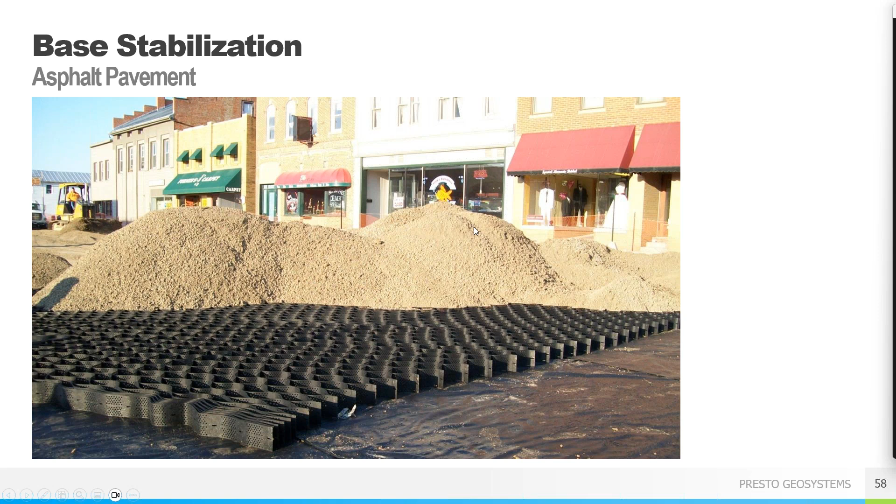And then we're going to show how much we can cut that cross section down. Even on some projects, we're able to cut the amount of asphalt or concrete or roller compacted concrete that you have, because we reduce the stress reaching the subgrade. So from that, we can actually back calculate and help you out. You might be able to even lessen the amount of the wear surface of your paved surface.

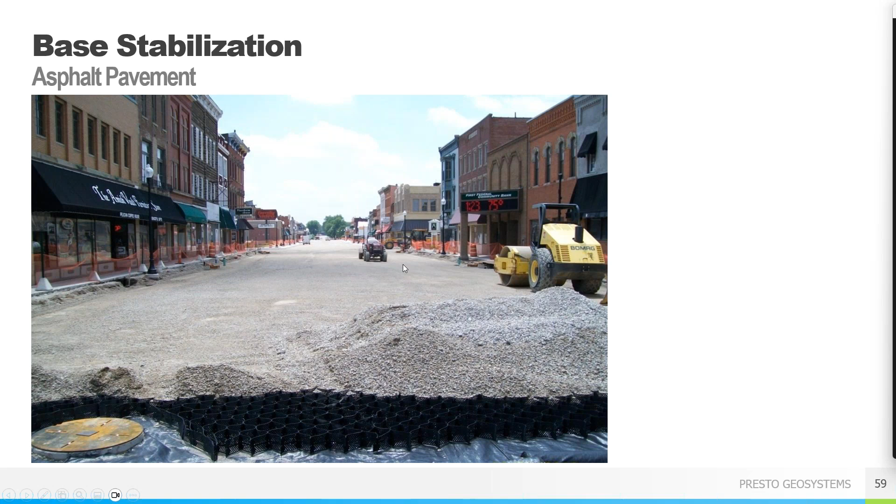So it is very flexible. You can see in the field, before it's filled, it's very flexible to go around any kind of obstruction, manhole covers, anything. You can cut it with a razor knife in the field. The good thing about it too is that once you infill it and compact it, you can come right behind it and start putting the asphalt down.

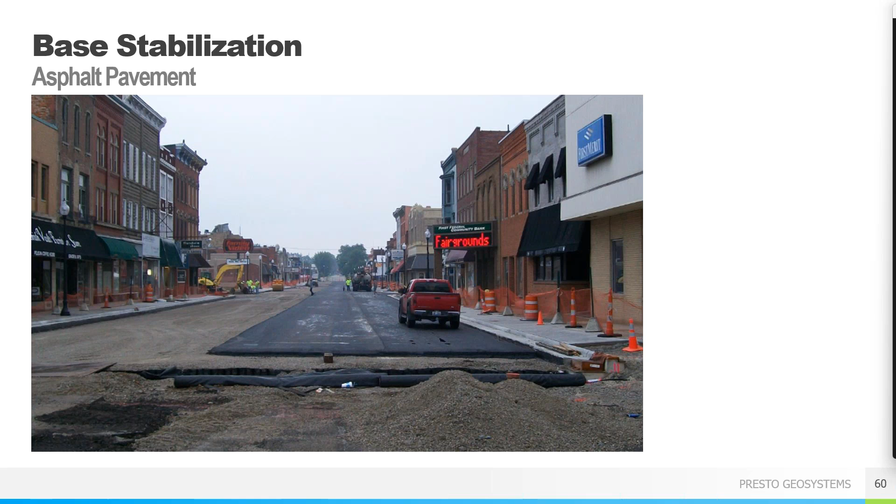So you can see here, basically they stopped for the day putting the GeoWeb in. Here's the geotextile getting ready to be expanded the next day. They didn't wait. They're right on top of it with the asphalt. So there are really no delays, weather delays. We can install this stuff in rain. It's not a problem. So a very flexible solution.

Here's another project we did. This was an interesting project because this was a haul road that experienced some really heavy industrial traffic, about 1,500 40-kip axle loads daily. They initially applied 4 inches of cold mix asphalt over this prepared 12 or 18-inch subgrade. The intention was to provide some load support, but really to reduce dust and limit the grader maintenance, because it was an unpaved road.

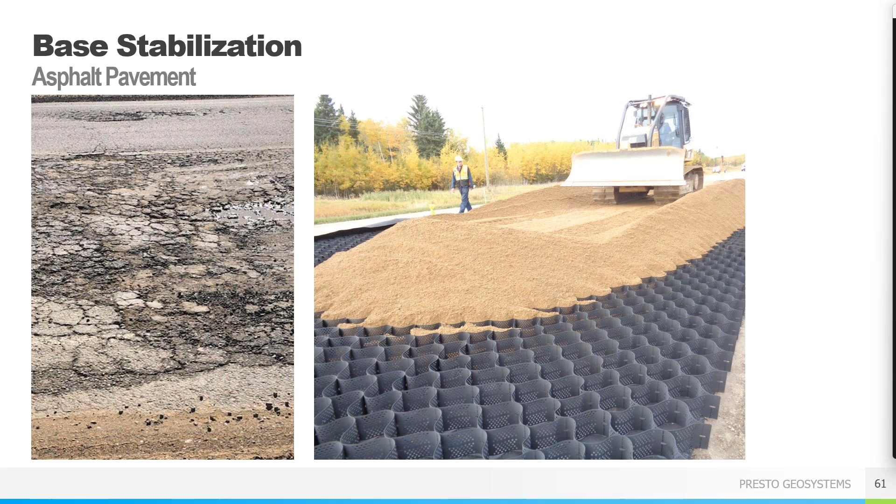But with that traffic and the heavy loads, it just overwhelmed that cold mix asphalt. So once again, this owner had a lot of experience using GeoWeb on some of their unpaved roads, with great success. So they reached out to us, and we had to come up with something that could meet their demands. And also we had to keep one of the lanes open. So we actually did it two ways.

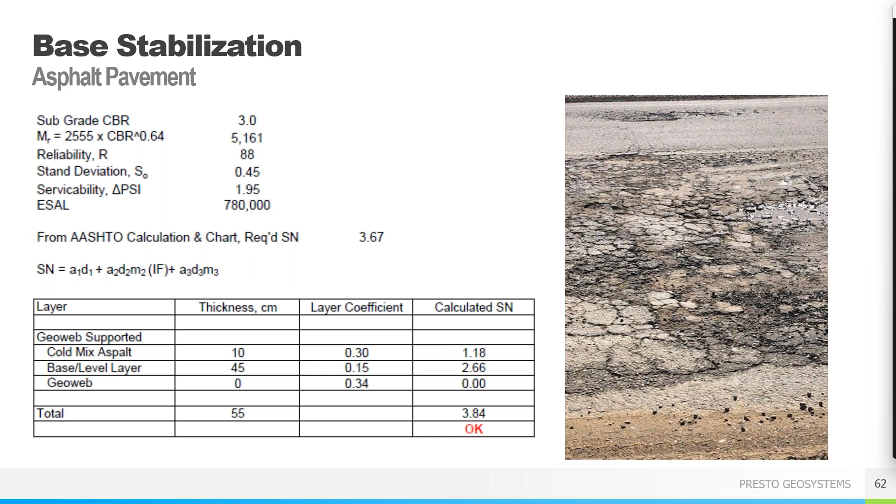We went and looked at, using the AASHTO method, what the existing roadway structural number was. So we sort of back-calculated to it. We saw that the existing roadway was built for not even 800,000 ESALs, it was a little bit less than that, but we needed like 5.4 million ESALs to meet the traffic demand. So it's significantly short. So no wonder that roadway was failing.

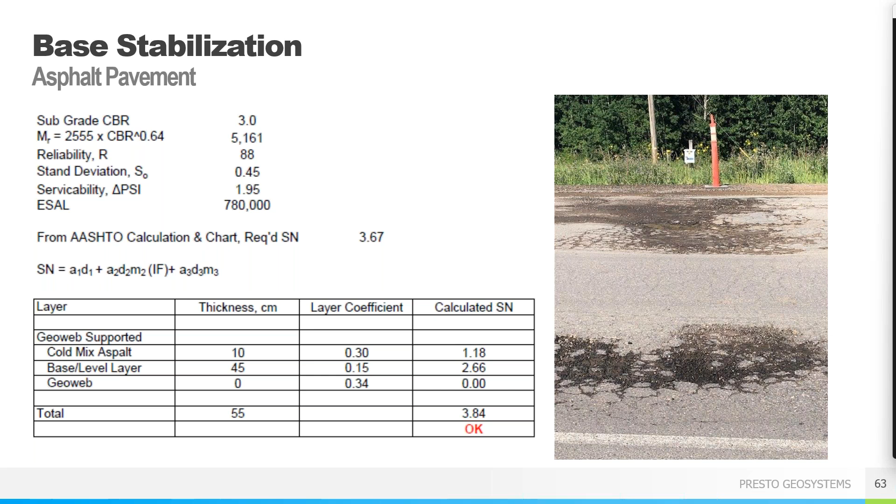As you can see here, this is really just months after they put that 4 inches of cold mix down. It started to degrade. There was no reinforcement. So we really had to come up with something that would provide that support for over 5 million ESALs, and also provide a stable road surface. So once again, we took the AASHTO 93 calculations and created a structural number.

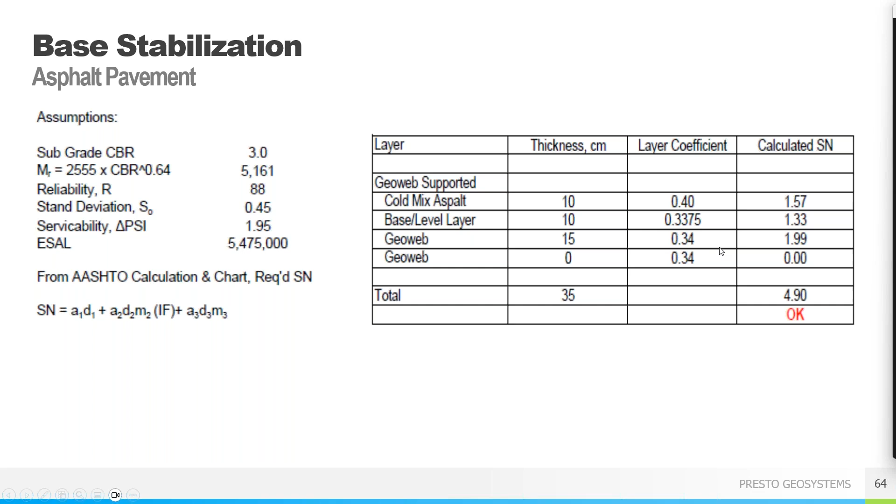Here you can see how we look at using GeoWeb, just like geogrids or geosynthetics. We improve the layer coefficient of those layers that we structurally support. So depending on the subgrade strength and the number of ESALs, we're going to have a GeoWeb improvement factor, we call it. We'll work with you on that. So we're going to enhance that structural layer; this one was originally at 0.15, and we increased it to 0.34. So it's a significant improvement to that layer.

And here's what we came up with for the cross section. This was based on a subgrade CBR of 3%. We put down an enhanced woven geotextile with 2,800 pounds per foot of reinforcement, and a 6-inch web filled with, as I mentioned before, that 5mm rejects screenings. They had some a little bit better than that, but it was pretty low.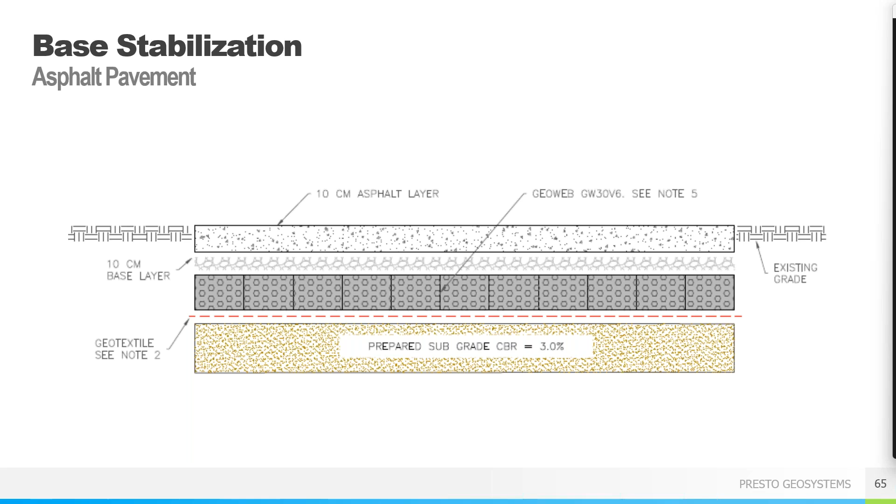We covered it with, here you can see, a 4-inch wear surface over the top, and then a 4-inch cold mix asphalt layer. We've done a significant amount of extensions to this road over the last 6 years. I think this year we're doing a 17-mile extension again. So this has been a very successful road that hasn't really required any maintenance.

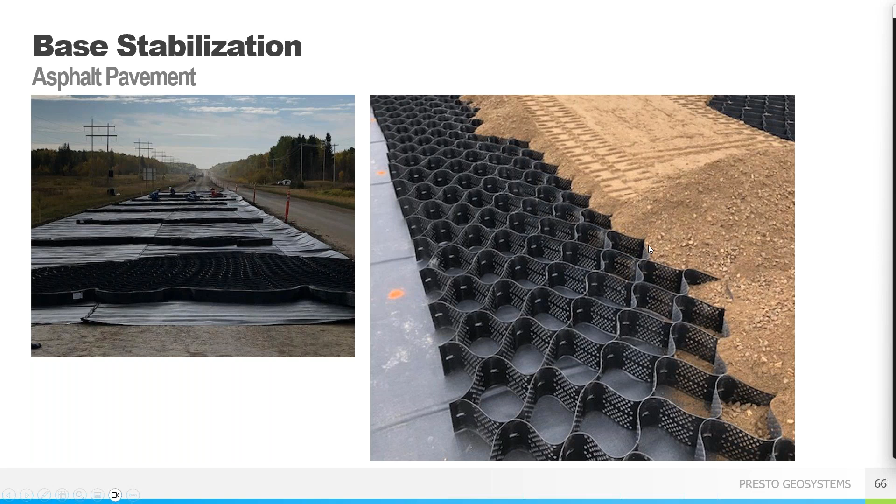Another really important part of this road is that they had to have full access. So we had to come up with a phase plan to only refurbish half at a time. During the day, the traffic flow was managed with flagger control and diversions, but at night, the unpaved section was reopened. So like I said, it's a very flexible solution. It's basically an unpaved road. At the end of the day, they fill it up with aggregate before the asphalt can be placed, and you're basically driving on an unpaved road.

So this is what a portion of the road looks like after a couple of years in service. This was the first portion that we did, with reduced maintenance. The frost heaves were not an issue, and it's performing really exceptionally well.

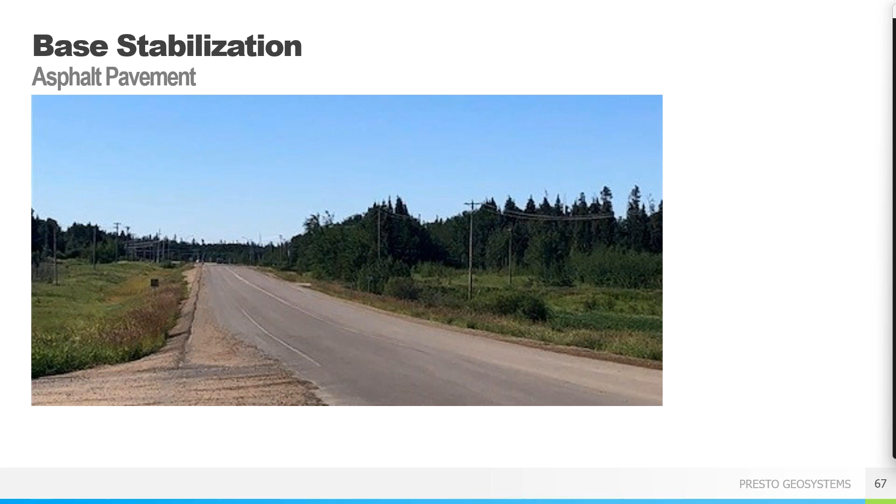This was an interesting project. It's not a road, but I like to show it because it was another value engineered solution where they wanted to use a couple layers of geogrid and high quality aggregate. When it went to bid, it came in significantly higher. This was out by the Seattle airport, by SeaTac, and the city was not going to let all this high quality aggregate go through downtown Seattle to get to the site.

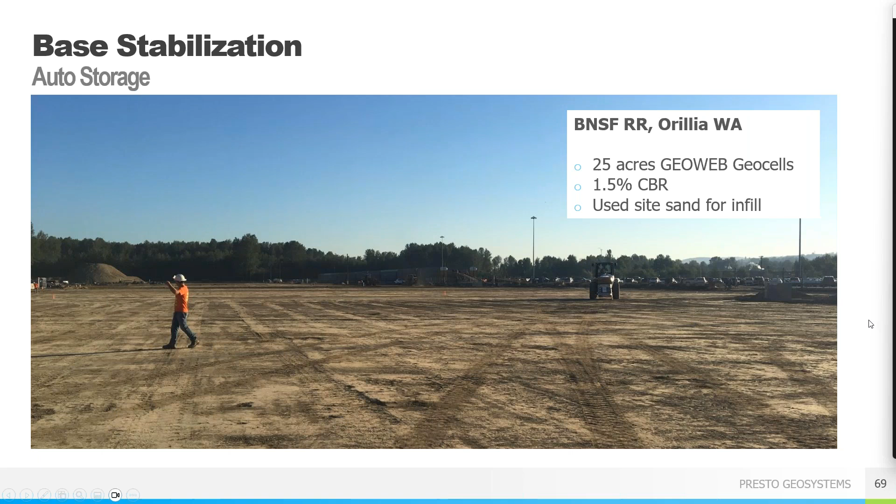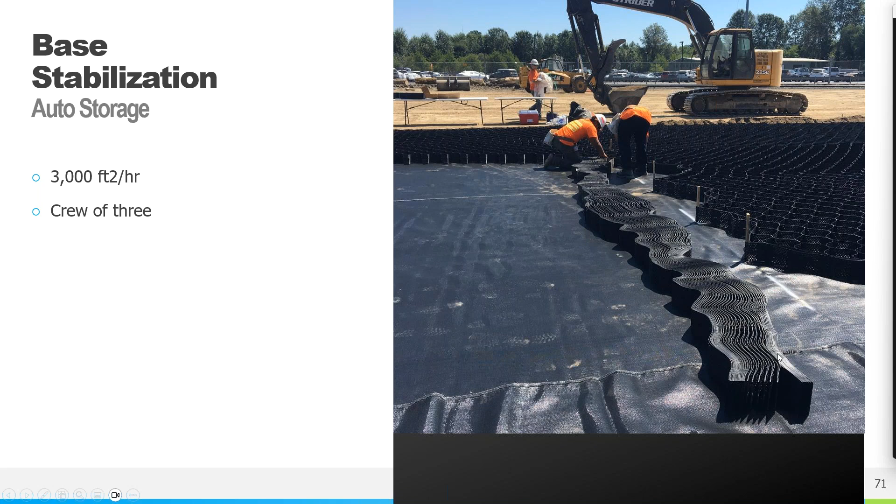So they came to us. We did a value engineered solution, and we actually saw that we could use this on-site fill, so we stockpiled it and mixed it with aggregate. Once again, staging is important. We'll go through it with you. Make sure you have all the tips and tricks to put it in. As I mentioned before, those 3 guys can install about 3,000 minimum, up to 4,000 or 5,000 square feet an hour. They're installing multiple panels at a time, so it goes really fast.

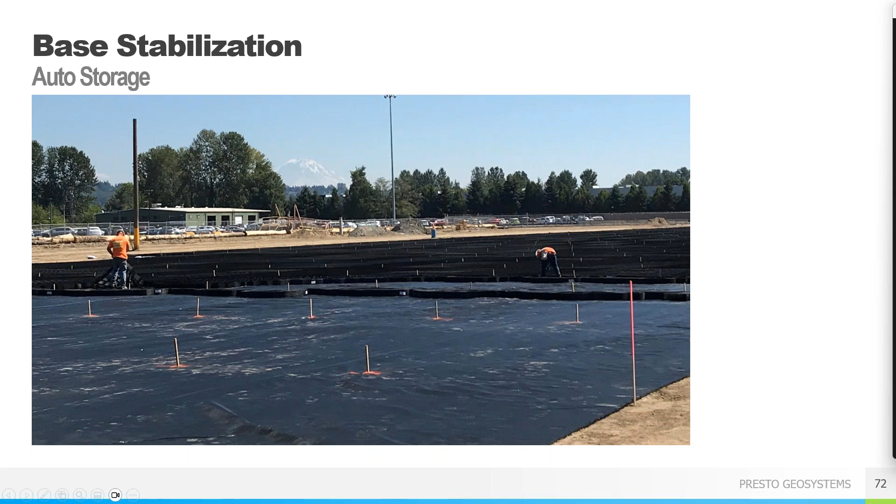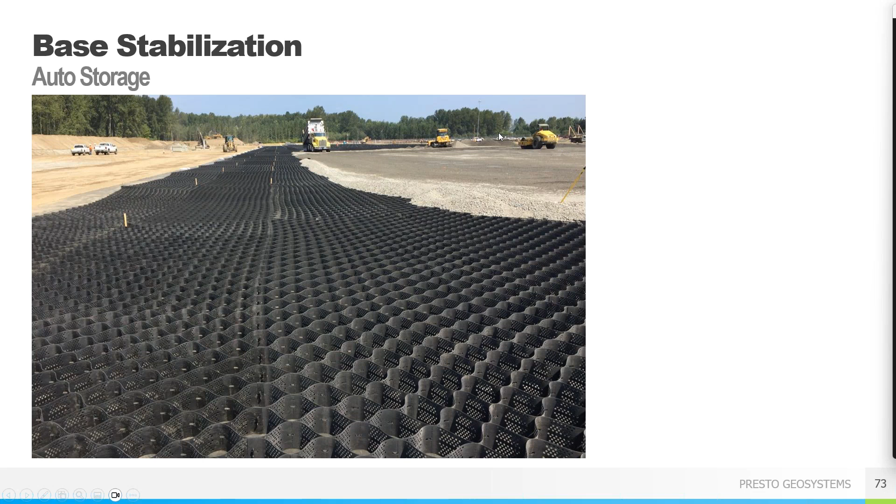Here you can see this contractor wanted it really specific. So this is each panel. This is 8.5 feet wide, 27 feet long. But you don't need to be that precise. So we'll help you with that. Once again, here you can see that stockpiled material. And you can see here they've had those survey stakes. They did this for about half the site, and then they basically stopped because it's really pretty simple to get it. And once again, you're just dumping the fill, spreading it with a bulldozer with the GPS system, and coming back with a roller, no vibration or limited vibration, to compact it.

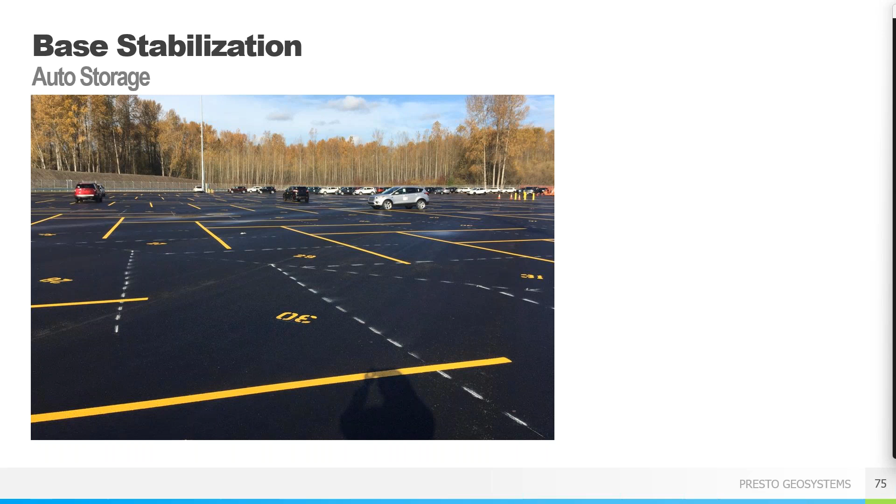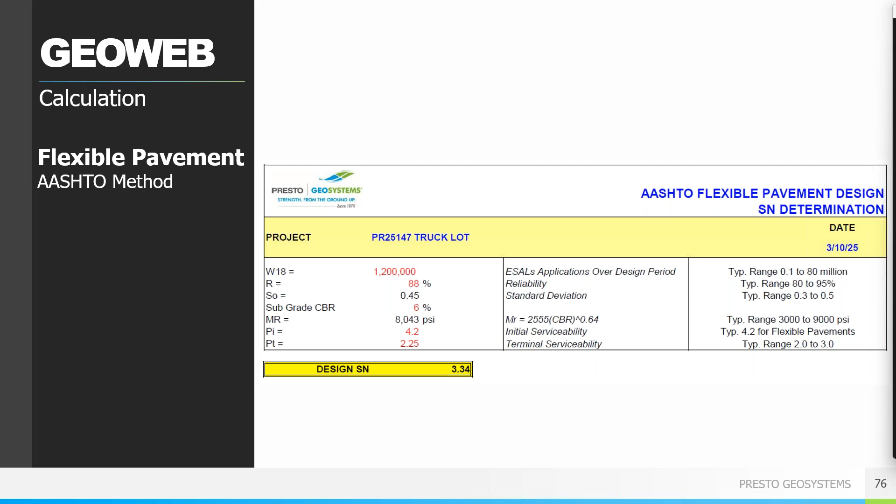Just an up close picture showing dumping the mixed aggregate onto the GeoWeb panels, and then the finished surface. Whether it's any type of flexible pavement, if it's hard surface pavement, we use the AASHTO method. It's a heavy duty pavement. We use the heavy duty pavement design programs. And we also use roller compacted, the British Ports method, the Interpave method for designing heavy duty pavement. So any type of hard surface pavement you're looking at, we can help you out with that. And we'll go through the method with you, go through our improvement factors, and show you how the GeoWeb system really works.

If we're not a good solution for your project, we're going to be upfront and tell you that GeoWeb is not the perfect application for this site. Maybe it's a little bit overkill. We'll then work with our distribution network to get you a solution that provides enough reinforcement at the most cost-effective cost. We really do shine in those low subgrade CBRs, say less than 3. We do a lot of work with GeoWeb in higher subgrade CBRs when you're looking at differential settlement and consolidation settlement control. But like I said, we understand we're not the solution for everything. So we'll make sure that we work with you on that.

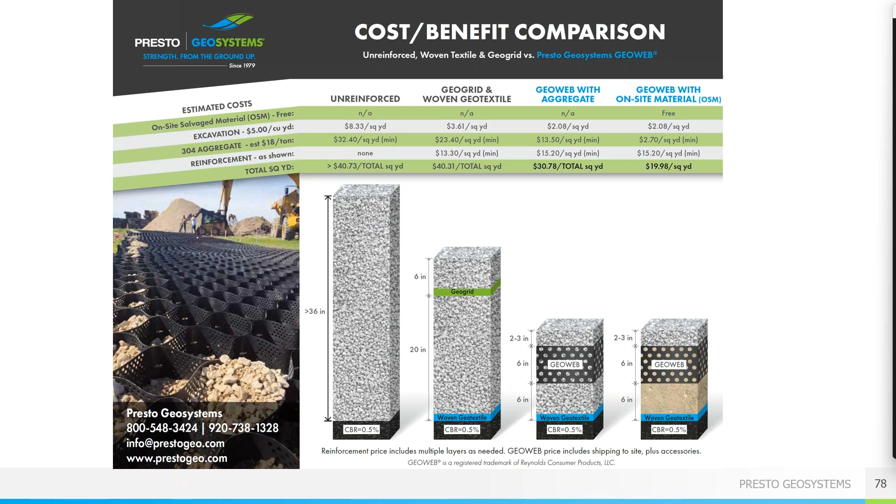I also mentioned before carbon reduction, which is becoming more popular on all of our projects, especially overseas. We're looking at carbon reduction and how GeoWeb can reduce cost, not only in materials, transportation, manufacturing the product and the aggregates, but also carbon effects versus using different materials.

So in summary, GeoWeb is a very flexible solution. We can use all of those different infills. We can use coarse sands, above a 35 sieve. If we limit the amount of fines, say the 200 sieve, to about 12%, give or take a couple percent, we can use it as an open graded system. It allows a lot of water to flow through the system, or even on-site stormwater control and drainage. So we can potentially limit or reduce the amount of stormwater pond that you require.

We also have projects on some sites where they were required to add on to their stormwater ponds, but we showed them that we could keep that water inside the GeoWeb system and slowly percolate it into the ground or into their existing ponds. The states let them have credits.

So something else, we really do shine, like I said, on those low subgrades under CBRs, but we also can help you in heavy load situations with higher CBRs, like mine haul roads, intermodal, reach stackers with loadings up to a couple 100,000 pounds, 150 psi tire pressure.